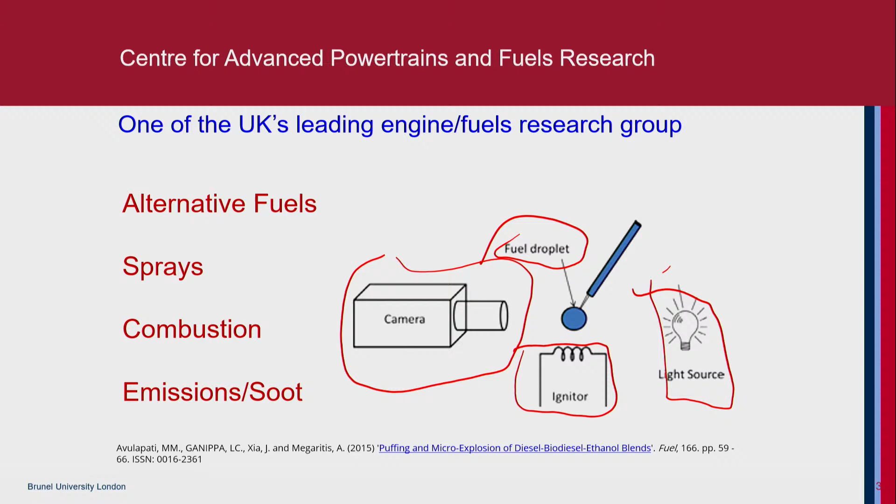Yeah, it's a very highly cited paper which we did together at this point. So if you have to do any work on fuels, then basically you need to have fuel here. So you have the fuel. You need to have a temperature here, an imaging device, and an illumination source. So this is a simple setup. We have a number of setups with high pressure or reciprocating engines, or maybe at fundamental levels, or maybe as jet setups also.

That's the background about Brunel and what I'm doing there. So let's go back to the course itself, high-speed flow theory and measurements in jet engines. Often myself and Dr. Madan discuss various research aspects, and this came up, and we thought we'd propose something on this. The topics that will be covered are given there. We look at the overview of gas turbine propulsion systems this morning, where we look at the turbojet, turbofan, turboprop, turboshaft, not in detail, just an overview.

Then this afternoon, we look into combustion in supersonic and hypersonic engines based on the Rayleigh flow theory. In the course, we'll also cover shocks, shock waves, and application of shocks in supersonic inlets. We also look at the nozzle flow under supersonic conditions. We'll look at ramjet and scramjet, and a major part of it is also measurements, where we look at various optical measuring devices and measuring techniques. So this is the typical content of this course.

Okay, now let's go into today's topic. It is the overview of gas turbine engines used in aircraft propulsion.

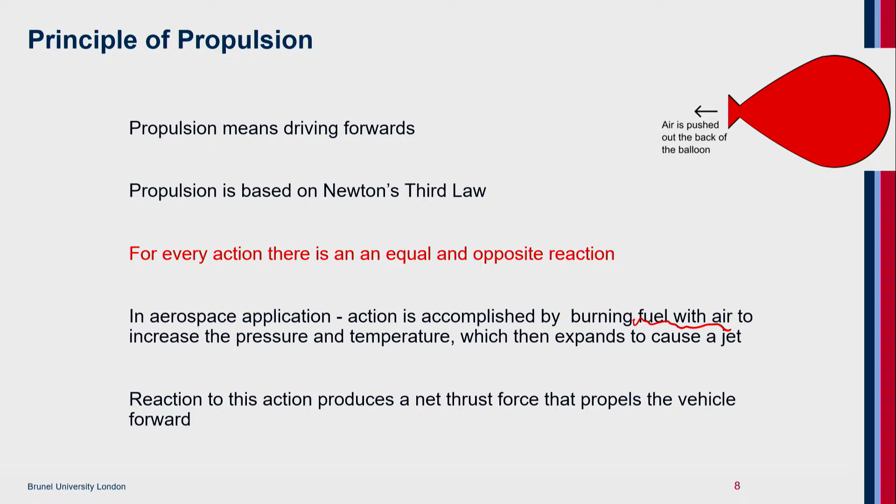So in aerospace applications, action is accomplished by burning fuel with air to increase the pressure and temperature, which then expands to cause a jet. So the reaction to this action is the thrust force that causes the aircraft to propel forward. Okay, so this is the basic principle of propulsion.

Now if you look at the classification of aircraft propulsion, basically you can classify them into two: air-breathing propulsions and non-air-breathing propulsions. I need not tell anything about rockets, because Sriharikota is not very far from your place. You're pioneers on rocket launching, but for this course we are going to look only at the air-breathing engines.

Until 1940, people were debating whether we need a two-stroke engine, a four-stroke engine, an air-cooled engine, a water-cooled engine, or a rotary engine. Much of the research was focused on reciprocating internal combustion engines until 1940. Since then, the gas turbine developed, jet propulsion started picking up, and not much talk is there, but still there are a few aircraft with reciprocating engines for training purposes. So we will be focusing more on the jet propulsion engines.

Within that, we'll be looking at gas turbine based propulsion today, and then we will look at ramjet, scramjet. If time permits, we'll look at the turbo ramjet also. Okay, so this is the overview which we'll be covering this morning.

Starting with a turbojet engine, it's a T38. What you see there is a twin turbojet engine. Second one is the commercial aircraft with a turbofan engine, and then also commercial as well as military application turboprop, and then you have the turboshaft engine here.

So let's look at the turbojet engine. So before we even look at it, let's... okay, I think I need to sit, it's too much bending here. Okay, so let's start with a turbojet engine here.

The basic fundamental aspect of a jet engine is the gas generator, which means it has three main components. One is the compressor, which is driven by the turbine. So the compressor is coupled to the turbine. The turbine gets its power and energy from the burning of fuel in the combustor. This is the cut section view of it. It's a very simple schematic, and this is basically what we call a gas generator.

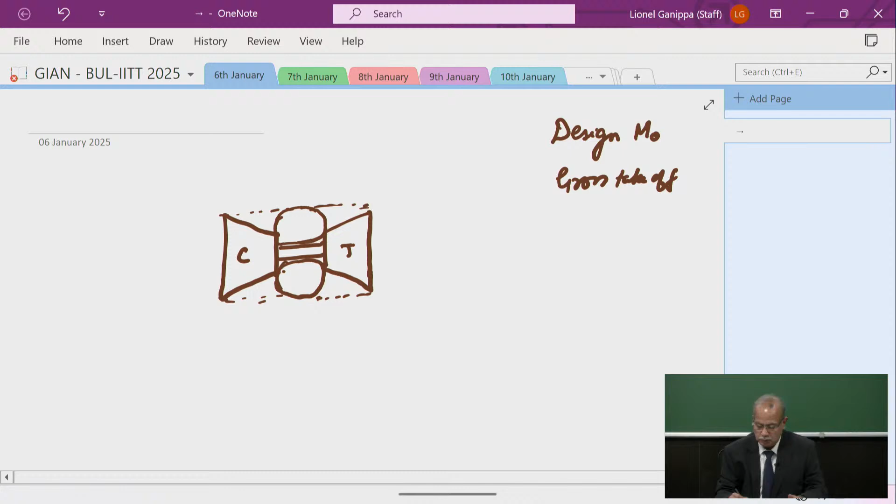Now you need to size these components. This sizing depends on what is the design Mach number, what's the design speed at which you want to fly the aircraft, what is the gross takeoff weight you want to lift the aircraft, what is the transonic acceleration, how quickly you want to go from Mach 0.9 to 1.1 or 1.2. That's what we mean by transonic acceleration.

Depending on that, we define the pressure ratio of the compressor, the adiabatic efficiency of the compressor, the amount of fuel to be injected into the burner, the air to fuel ratio in the combustor, what type of thermal barrier coating we need to apply onto the combustor, what is the thermal limit denoted by tau suffix lambda, the maximum temperature up to which the combustor can operate, the pressure ratio across the turbine, and the adiabatic efficiency of the turbine. I can keep going because they are made up of a number of stages, so there's stage efficiency, number of blades, and blade profile.

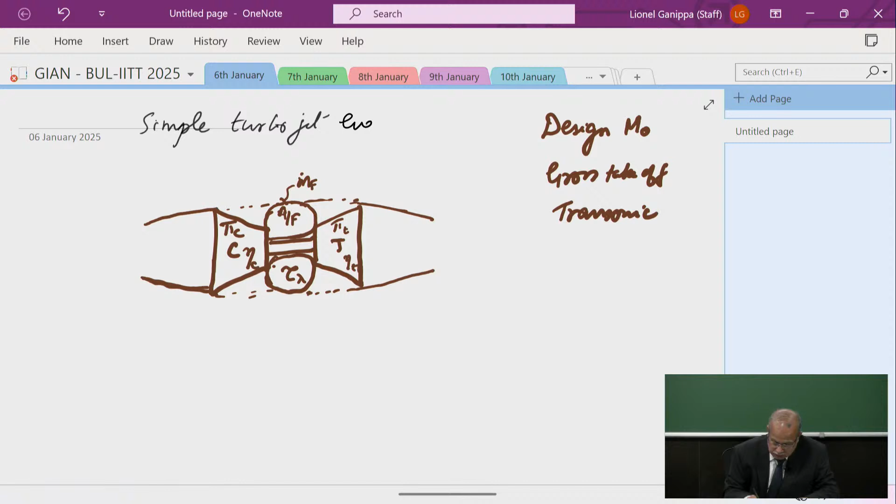So this is the fundamental aspect of it. This is called the gas generator. Now if I add an inlet to it, and if I add a nozzle to it, this becomes a simple turbojet engine. So here is the inlet, and here is the compressor.

Were you able to see what I was writing out? It disappeared. So this is the inlet, and this is the simple turbojet engine. So here is the nozzle here.

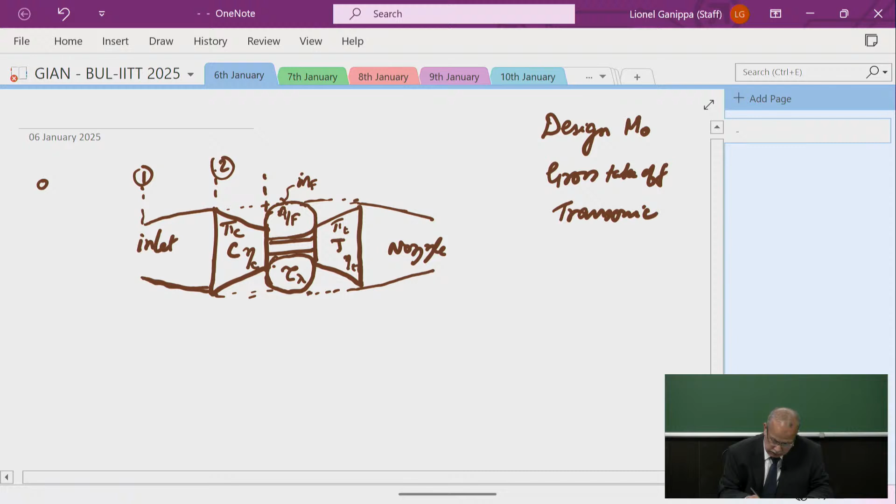The standard aerospace recommended practice is that this is the atmospheric environment at which the aircraft is flying - the unperturbed condition, station 0. Inlet lip, here is the front of the compressor. So exit of the compressor and inlet to the combustor. Exit of the combustor and inlet to the turbine. And here is the exit of the turbine, station 5.

Now, as I mentioned, this is a simple turbojet engine which we are going to develop further. There will be some components coming between station 5 and the exit, station 9.

So an aircraft is flying at flight static conditions. The pressure will be P naught, the temperature will be T naught, the density will be rho naught, and the velocity will be V naught, with the corresponding Mach number M naught.

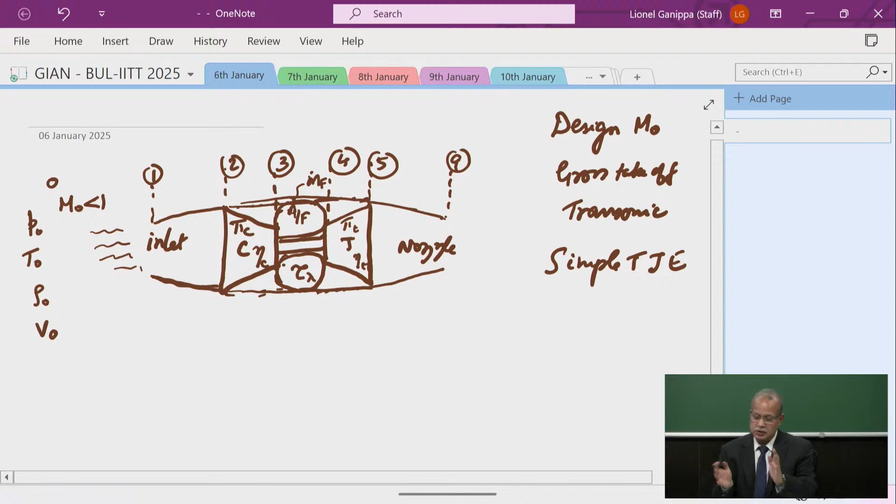So when the air enters into the engine, you can see that the function of the inlet is to decelerate the flow. We are now looking at a subsonic flow. The flow enters into a diverging geometry. So as the flow enters into this engine, what happens? The velocity decreases. What is the effect of a decrease in velocity?

When I talk about velocity, there is a specific kinetic energy associated with it. The kinetic energy here at this point decreases. This is where the principle of conservation of energy comes into picture. The energy decreases in one form and disappears, but it will reappear in some other form, which will cause the pressure to increase. So that is the main function of the inlet - to decelerate the flow, make use of that kinetic energy, and increase the pressure.

The whole objective is to improve the efficiency of the combustion process. We need high pressure into the system, so you increase the pressure. At the same time, we need to minimize the losses. That is the main function of the inlet.

Then the air passes through the compressor based on the pressure ratio of the compressor, which is designed based on the flight speed. As a rule of thumb, the faster you go, you don't need a high pressure ratio because you get the ramming effect there. Based on the pressure ratio of the compressor, you increase the pressure and feed that high pressure air into the combustor, where fuel is injected, mixed with air, and burned to high temperature.

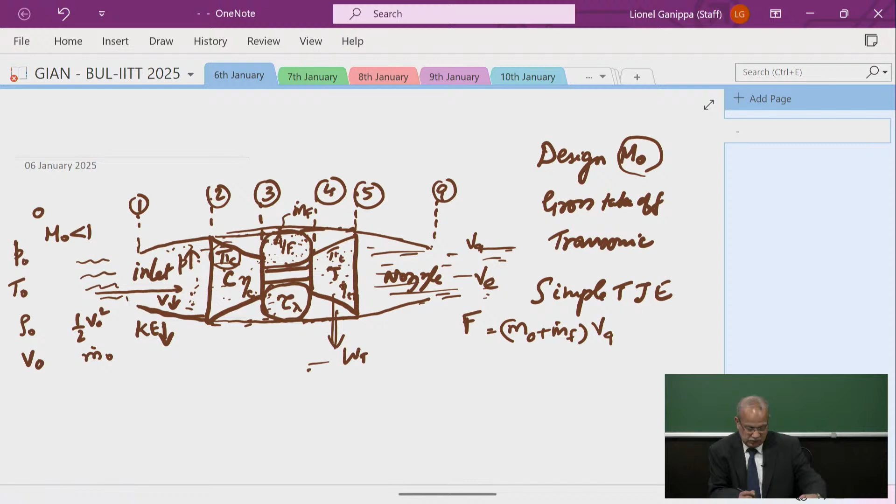The high temperature burned gases expand through the turbine, and that turbine produces some work. The work produced by the turbine is used to drive the compressor. The amount of energy left out is expelled out of the nozzle, producing the velocity of gas exiting, V9, and then the thrust produced is equal to the mass coming in, m dot O plus m dot F. This is the gross thrust produced by the engine. Okay, so this is the basic principle of operation of a turbojet engine.

Now let's try to look at it from a thermodynamic point of view.

So on the y-axis is the enthalpy, on the x-axis is the entropy. This is the unperturbed free stream condition. The pressure is flight static pressure P naught. Let me represent it on an HS diagram. This is the pressure P naught, and these are the isobars going in this direction.

Now it is flying at a certain environmental pressure and at a certain temperature. So this is the temperature, T naught. So when I say enthalpy, which is nothing but Cp times T, Cp is constant here. So here is S naught. These are the initial conditions, the flight static condition, O.

Now imagine we are not even going into the engine. I'm going to put a pitot static tube outside. So what will happen here? The flow, coming at a velocity, let's say Mach 0.8, eventually as it approaches the pitot static tube, decelerates, which means kinetic energy is being lost. Eventually it comes to the point at the tip where the velocity is 0.

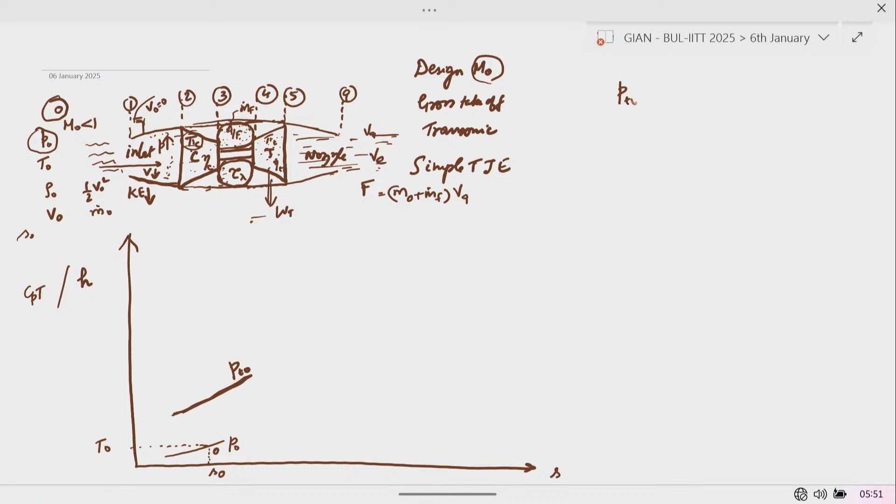So there is a relationship between stagnation pressure to static pressure: equal to 1 plus (gamma minus 1)/2 times M naught squared, raised to the power gamma/(gamma minus 1). There is also a relationship for TT naught by T naught, between the local property and the stagnation property, equal to 1 plus (gamma minus 1)/2 times M naught squared. Similarly for density, we won't look at that now - it involves the same term raised to 1/(gamma minus 1).

So here is the static pressure, and this is the corresponding isentropic stagnation condition, and this is the isentropic stagnation enthalpy, HT naught. One of the things even in real life applications is that the inlet is treated as adiabatic, and also the nozzles are treated as adiabatic. So here it is adiabatic, and here also it is adiabatic.

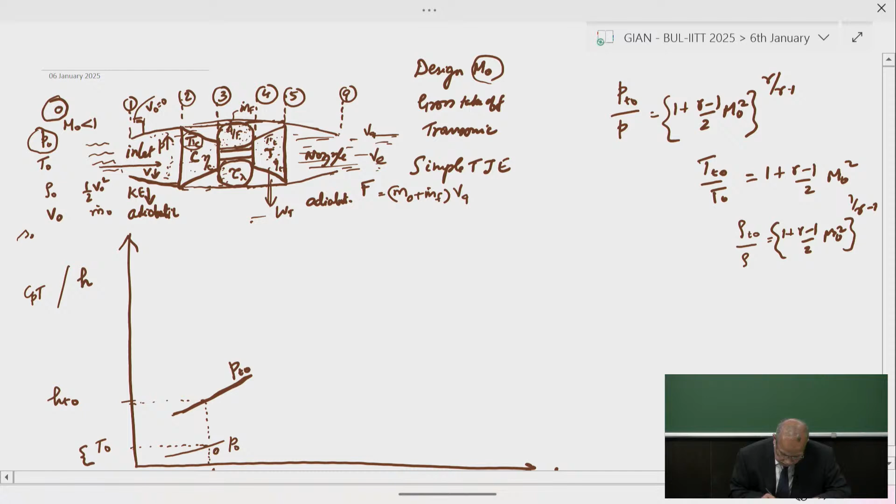Now this magnitude is the thermal energy, H naught, at which the flight enters in. So this is the point here. We have this flight entering at Mach M naught. So here is the thermal energy, and now here at this point, this is the kinetic energy, which is half V naught squared.

So what I am writing here is H naught plus half V naught squared, which is the energy balance equation - this is the total energy. That's what I write here. So H naught plus half V naught squared is the total energy, and total energy remains constant here.

Now the air enters into the inlet. The static pressure increases, and eventually we have a stagnation pressure here, PT naught. So from here to here, this is the process.

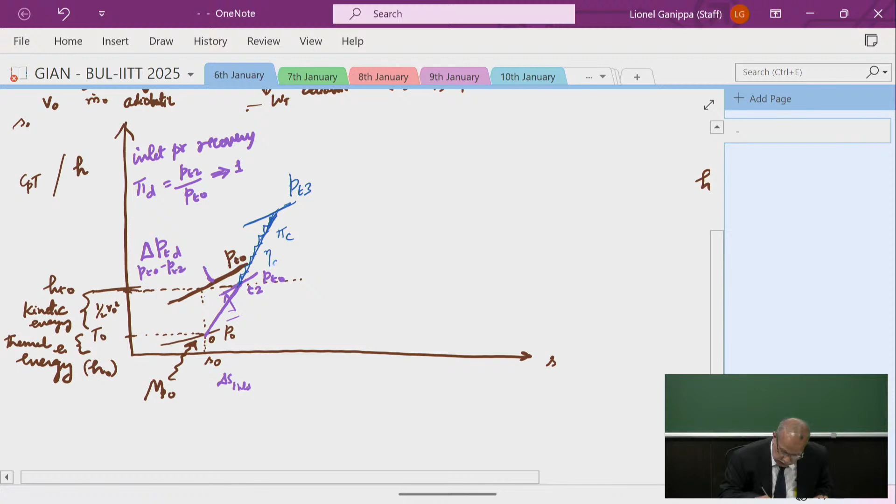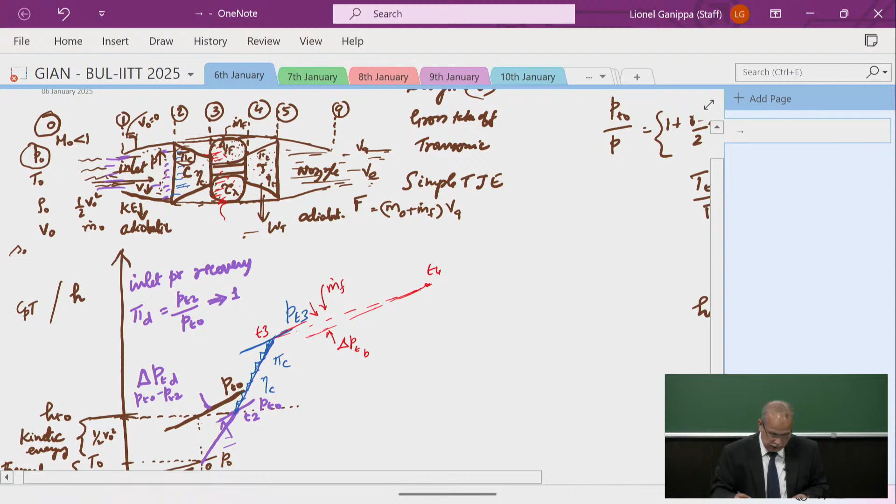Now once it has entered into the compressor and been pressurized, it enters into the combustor where air and fuel are injected. Combustion takes place at constant pressure, but in reality there will be pressure loss, delta P, total pressure loss in the burner. So here it is PT3, here T3, and here T4. This is where the fuel is injected, mass of fuel is injected, and fuel and air will mix to form an appropriate mixture, then burn and increase the temperature, after which it will expand in a turbine.

So it expands further in the turbine depending on the expansion ratio, giving pressure PT5 from PT4. So this is state T5, and then whatever energy is left out will be expelled out of the nozzle, where expansion takes place to the ambient conditions, flight static P9. So you can see it starts with static pressure, goes to stagnation, then ends up here. This is the nozzle pressure ratio, total pressure ratio across the nozzle. These are all geometrical parameters related with the nozzle, and it expels out at this point with velocity v9, from which we can calculate the thrust and so on.

So this is the typical cycle diagram of a simple turbojet engine.

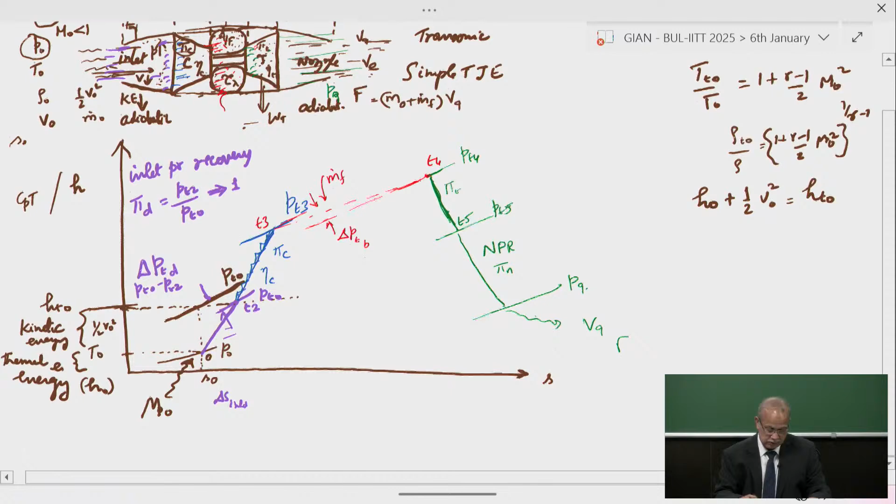Now let's look into the development of this simple turbojet engine, because not always do we want to operate it like this. At times, suddenly, if an enemy wants to attack, then probably you need to escape - that's what we call a dogfight, one aircraft chasing another. You drop the bomb, and then your adrenaline level goes up, you have to take a steep climb. In that case, you can't just do this maneuver with the existing engine.

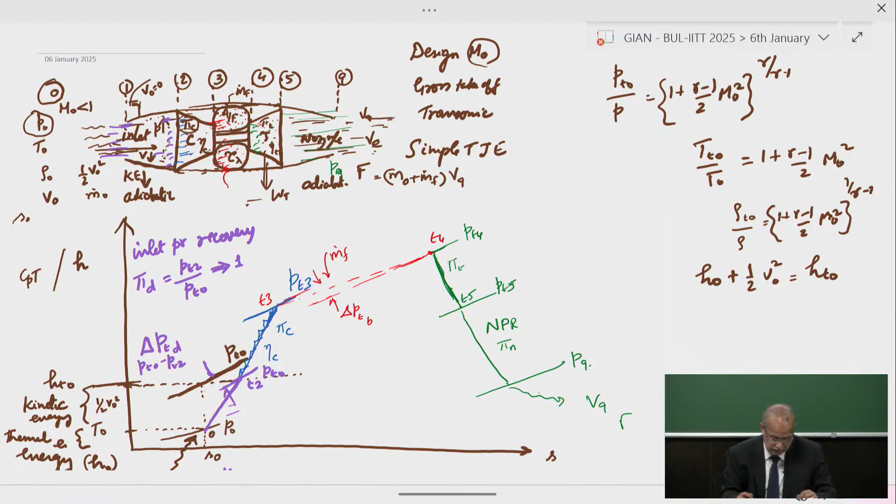So you need to modify the engine, and that is through including a term called afterburner. Now, what is an afterburner? Afterburner is a device that could be fitted to this simple turbojet engine so that we can have thrust augmentation. So if you are going to double the thrust, then the fuel consumption will quadruple. So we can't always use the afterburner - you use it only for a very steep climb or in emergency conditions, and then switch it off.

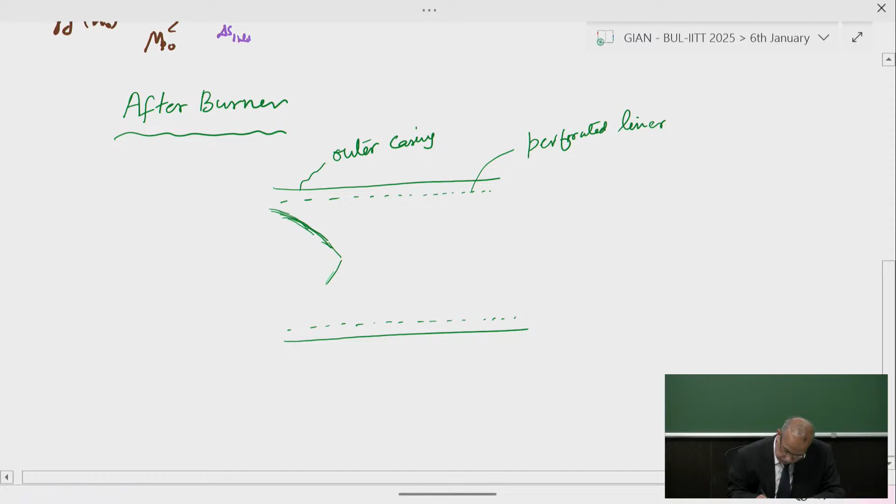Afterburner will have a device which has some casing, outer casing. It has a perforated liner. And this afterburner also, before the charge enters in, has a pre-diffuser. So this is the arrangement here - you can see that diffusing geometry. The whole idea is to decelerate the flow further down to reduce the velocity so that you could increase the residence time of the charge in the combustor.

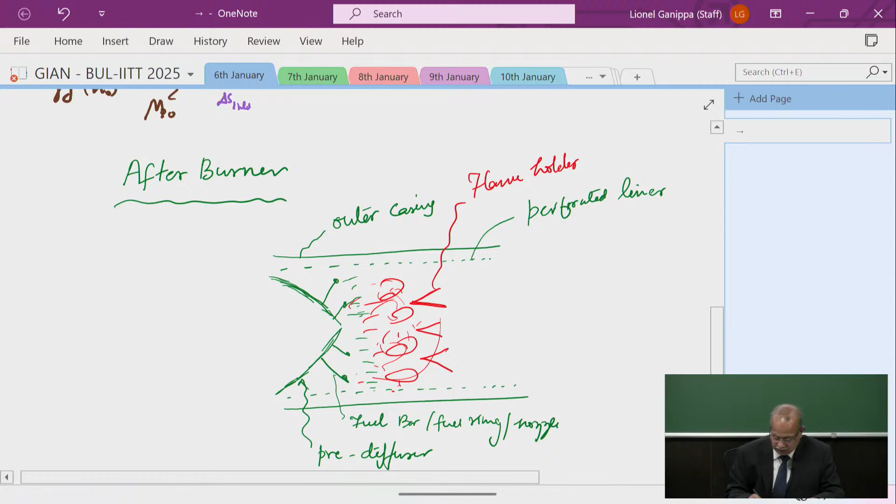And then we will have fuel bars or fuel rings to hold the fuel nozzle. Now this will be squirting fuel here. We want to make sure that the flame is there in this combustor participating in the combustion. To do that, we need something called flame holders. What's the function of the flame holder? The function of the flame holder is to create a local recirculation zone, so we increase the residence time of the fuel and air to be mixed and burnt, and then it will produce much higher temperature, and then this must be expelled out.

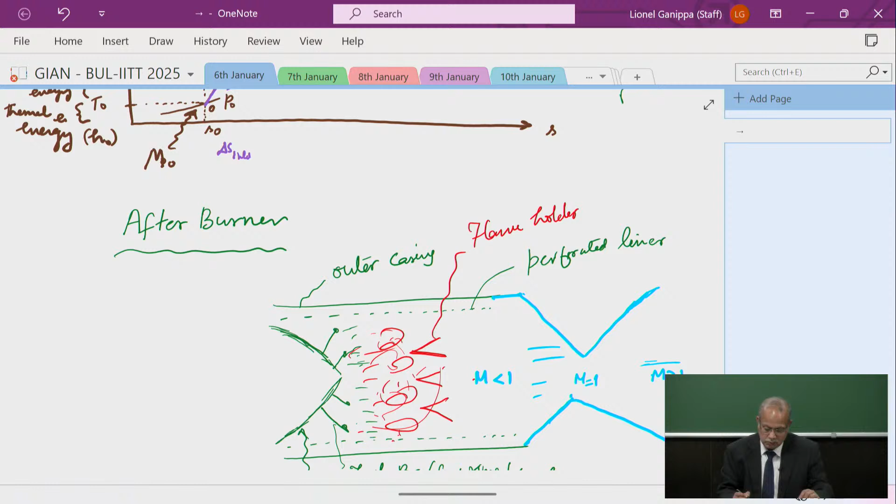To get the benefit, we need to use a nozzle with convergent-divergent geometry. When you have this geometry, Mach number will be less than 1 as the flow passes through it, approaches Mach equal to 1 at the throat, and then accelerates to Mach greater than 1. So you have the benefit of momentarily boosting and augmenting the thrust to go to high subsonic or low supersonic speeds. This is the afterburner.

Now where is this afterburner going to be fitted in this engine? Let's look at this diagram here.

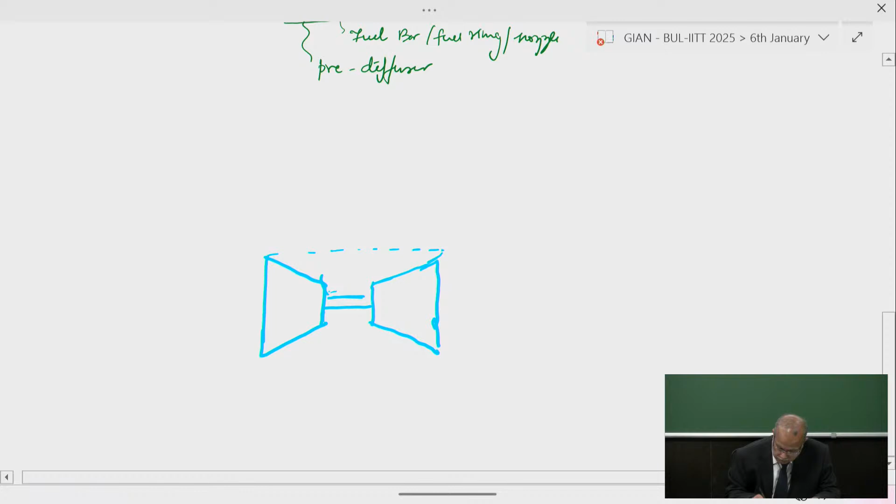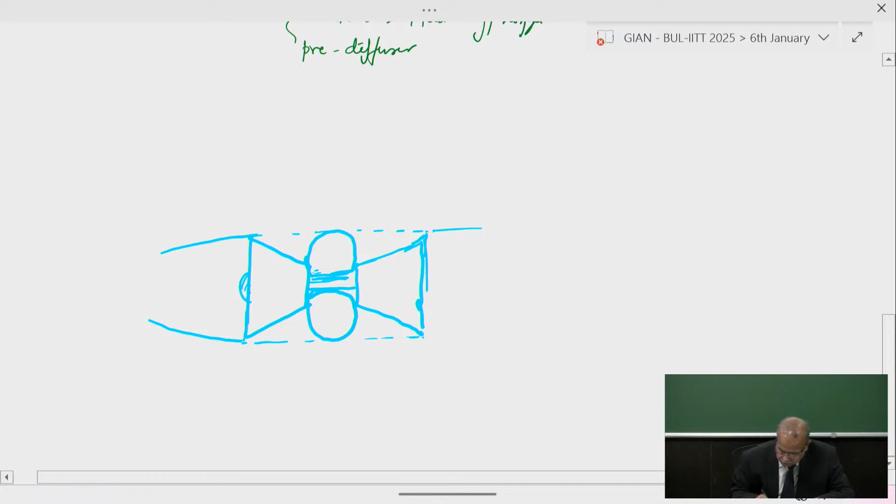As we discussed before, here is the compressor, here is the turbine, and this is the combustor. This is basically the gas generator, and this will have an inlet. This is the shaft that couples the turbine and the compressor, sometimes called a spool. Here is the fuel bar, and this is the afterburner with a perforated liner in it. Then you have this convergent-divergent geometry.

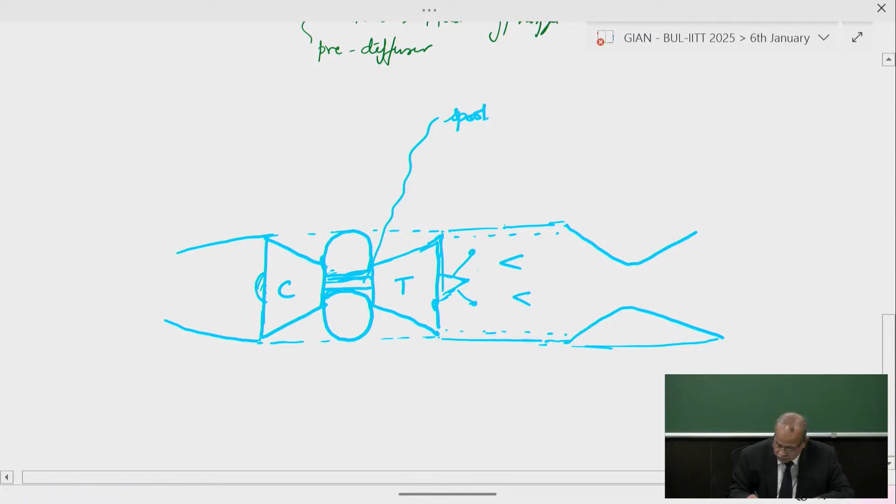Here you can see the unperturbed free stream condition. This is the inlet lip, frontal face of the compressor. Here is the end of the compressor, and it's the combustor, here is the burner. So if the mass of fuel is injected and is burned, here it is station 4, and here it is station 5. Now this whole afterburner unit is treated as a pipe with an afterburner device, and here is station 7, the end of the afterburner combustor. This is the throat, area 8, and this is station 9.

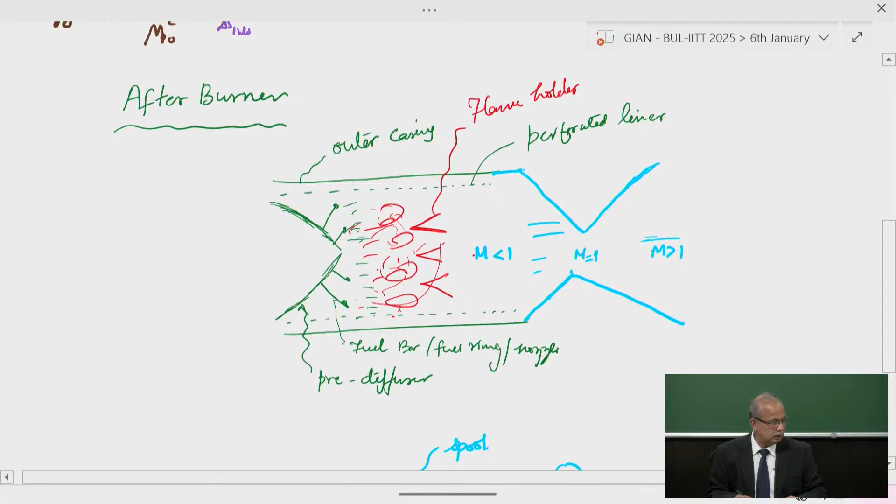So you can see that a simple turbojet can be modified by including an afterburner. If we include the afterburner, we are able to momentarily increase the thrust. The benefit can be obtained by having a convergent-divergent nozzle, which we'll be discussing a bit later on.

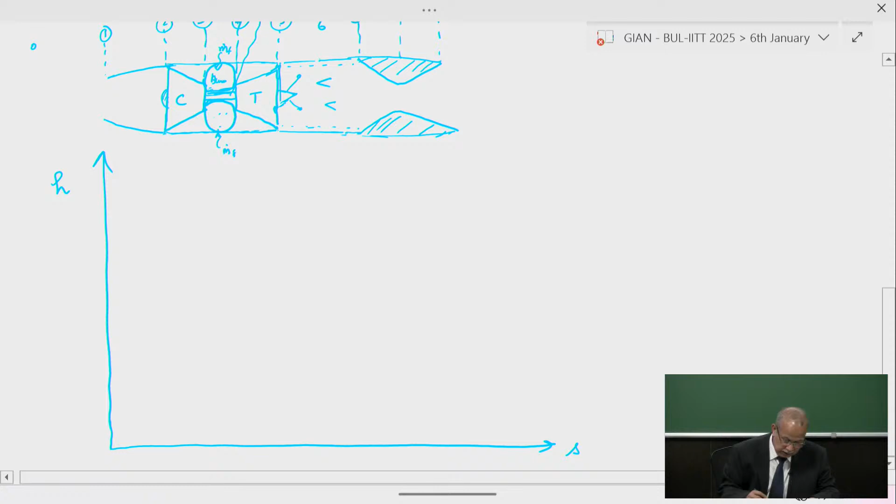Now let's look at the cycle diagram for this application. Here is the enthalpy, this is the entropy diagram. Here is the unperturbed free stream conditions. Now you know the details of it. Here is H naught thermal energy, S naught.

Here is the flight stagnation condition, PT naught corresponding to T naught. The total energy in the inlet is constant. This is the pressure PT2 at the face of the compressor, state T2. This is the point here, T2.

Then the charge will enter into the compressor. It will be pressurized. Here it will be pressure PT3, and here is the state T3. So this is the total state 3.

Then in the combustor, this is the actual path through which combustion takes place. This is the pressure PT4, this is the state T4. In other words, this is the maximum thermal limit, denoted by tau lambda. Tau lambda is basically the enthalpy at this point, which is HT4 over H naught, the maximum value. It's in non-dimensional form. This maximum temperature is also called the cycle temperature or maximum turbine inlet temperature, various terminologies.

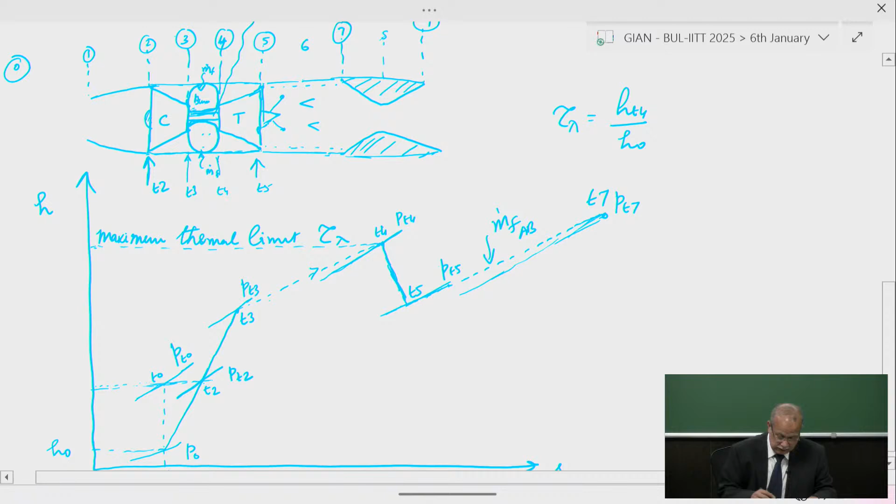Now it enters into the afterburner, where again fuel is injected. So the pressure at the exit is PT7. Here is the combustion taking place with the mass of fuel injected in the afterburner, so this is T7. Again, depending on the combustor properties, you can go up to this level or keep it to the same level as the previous combustor thermal limit. To differentiate it, I can say this is the thermal limit in the afterburner.

Then it expands in the convergent-divergent nozzle, so you can see that you are able to produce higher thrust here, down to point P9. So this is how the cycle diagram will look like for a simple turbojet with an afterburner.

So we've got some fundamental understanding now. So now let's go into the real applications of it.

So this is the inlet. This is the part of the inlet here. So all the process that I have explained, the physics is happening here. The kinetic energy is utilized to increase the pressure.

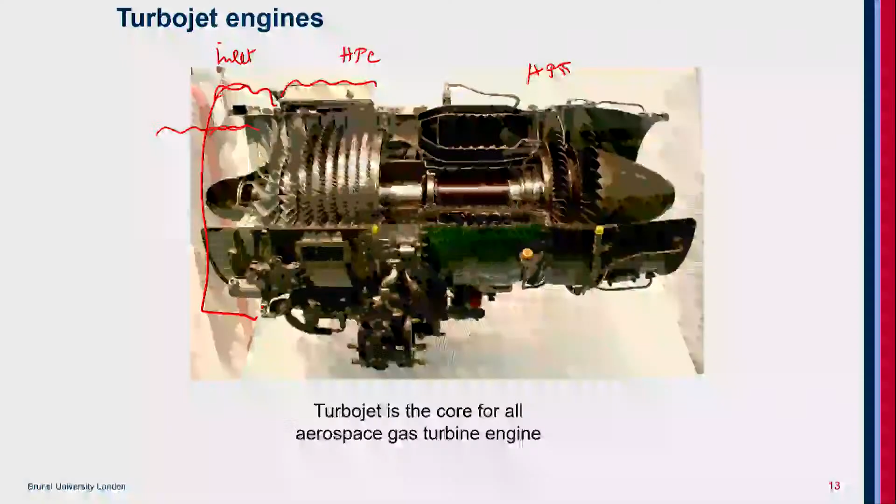So a rotor and a stator comprises one stage. A compressor will have a number of stages, maybe 8 stages, or it can have 2 sets of compressors, low pressure compressor and high pressure compressor. So depending on the number of stages and number of compressors, the pressure ratio will be varied.

So the high pressure air that is being pressurized in the compressor, after it's coming from the inlet, will enter into the combustor. So this is the combustor. And here the fuel is injected and it is mixed here and it is burned to have an optimum fuel air ratio. F is the fuel air ratio, which is the mass of fuel by mass of air.

And then the burned gases will be directed to the turbine where you get the power. That power is transferred to the shaft to drive the compressor. The amount of energy that is left out is going to be expelled out in the nozzle.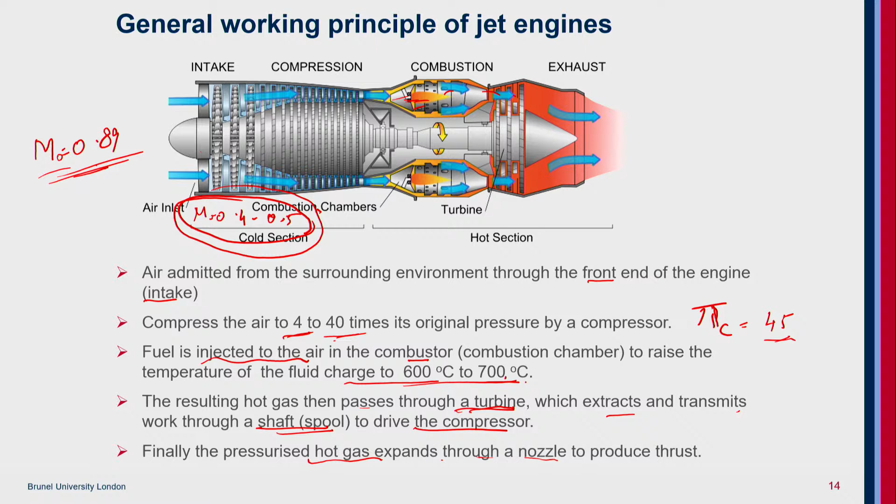That's the maximum limit. Then the pressurized air enters into the combustor, and the fuel is injected and mixed with the air in the combustor, and again the temperature increases depending on the mixture, fuel, calorific value, all those aspects. Then the hot gases will expand through the turbine, which extracts and transmits work to the shaft to drive the compressor. Finally, the pressurized hot gases expand through the nozzle to produce the thrust.

So the schematic that we explained before is now a bit more clear here. These turbojet engines are not fuel efficient, so a lot of modifications need to be made to improve fuel efficiency. But they are still used for defense applications because fuel consumption is not an issue for defense, and also for missile applications.

So I have explained this process of enthalpy and entropy separately, so now it's much easier for you to understand looking at the global scale here.

Now, one of the ways that you can modify a simple turbojet to augment the thrust is to include an afterburner. So here is this simple turbojet, and here is the one with the afterburner.

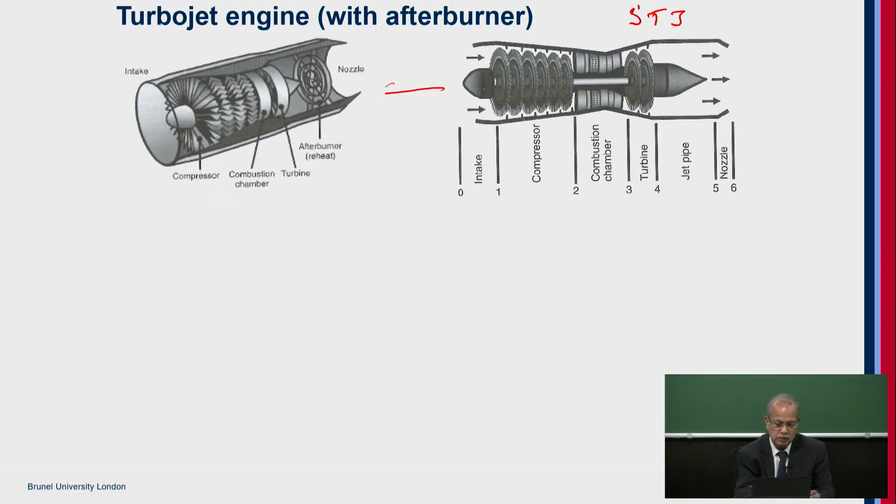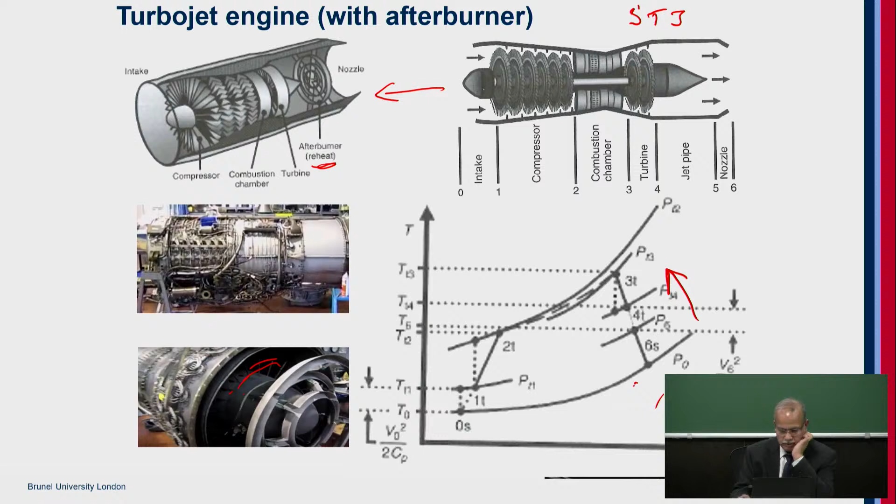So the cycle diagram - after it has expanded to PT3, PT4, then it will have a combustion process here in the afterburner, then expansion will take place. This is how the cycle diagram will look like. Understood?

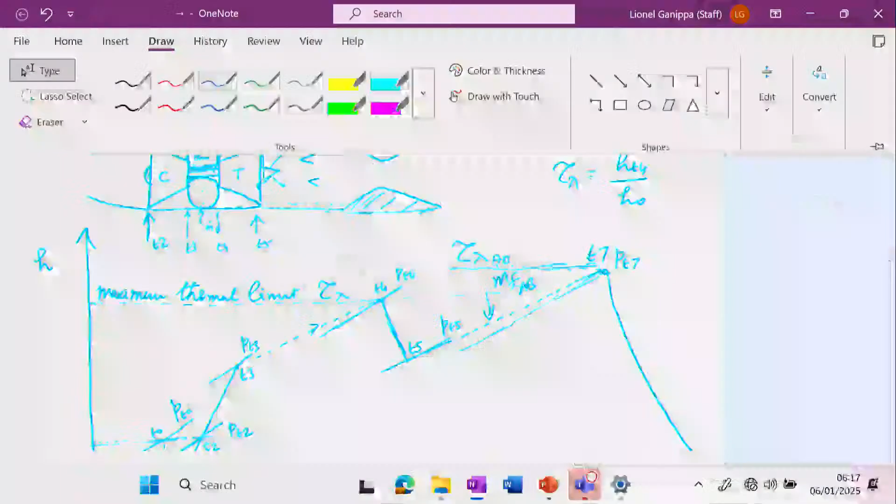So now let's look at the modification of a turbojet engine. Most of the commercial aircraft are really concerned about the consumption of fuel. They put a lot of focus because they want to make sure that they are fuel efficient. So let's see how the principle works - it still has the gas generator.

Here is the combustor. Here is the compressor. Here is the burner. Here is the turbine. This is the gas generator.

So the principle of going for a turbofan is basically an energy recovery process.

This is the gas generator, as we have seen already. Any further energy that is left out, energy that could be harvested, is done through incorporating a turbine, which is called the low pressure turbine or a free turbine. Sometimes it is also called the power turbine.

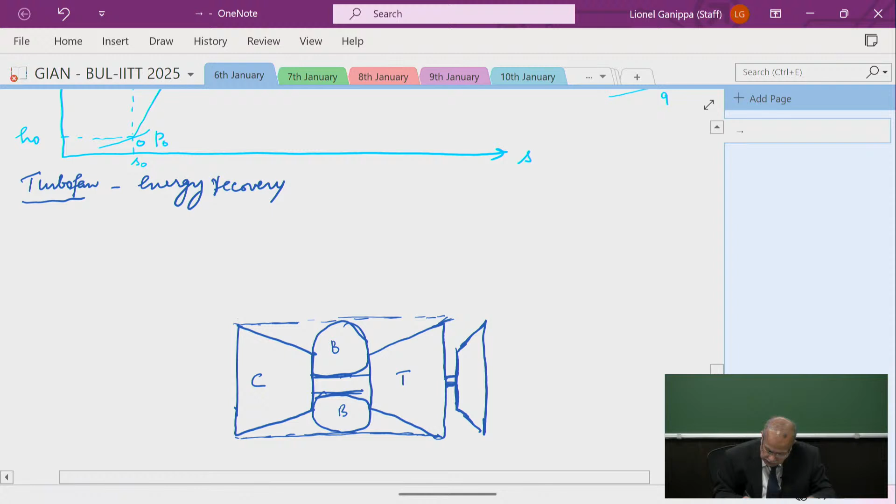Now you can see that this shaft is of different coupling to this one here. Now use this shaft power to drive a fan, and to place the fan inside a duct.

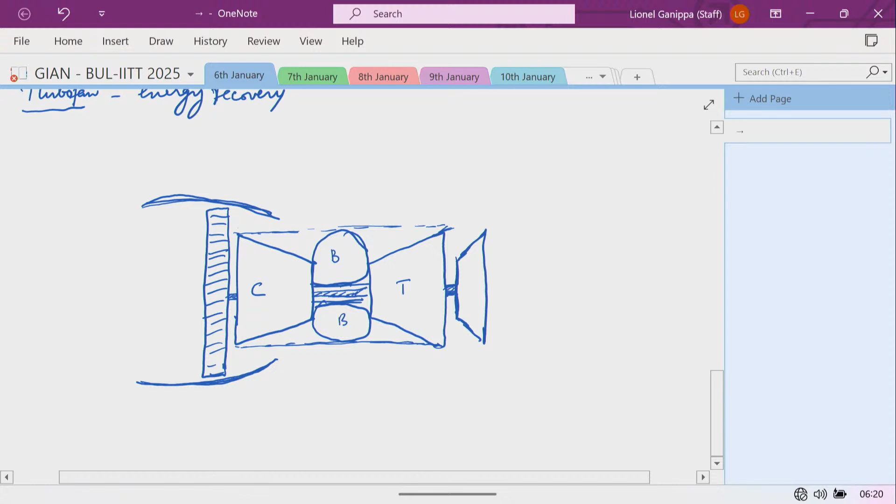So you can see that the central core of the jet engine is the gas generator, which is the basic building block. Whatever energy is left out is harvested in the low pressure turbine. So this is the high pressure turbine. The turbine which is closer to the combustor is the high pressure turbine, and the compressor that is close to the combustor burner is the high pressure compressor, and so on.

So this is the fan. We use this energy from the low pressure turbine to drive the fan.

So the station points are as follows: this is the flight static condition, inlet lip, and this is the frontal face of the fan, 2, and here it is 3, here it is 4. You treat it as one device - there are different ways to do it - and then here it is 9, in between 4.5, and here it is 13 and 19. These are some of the standard ways through which they are numbered.

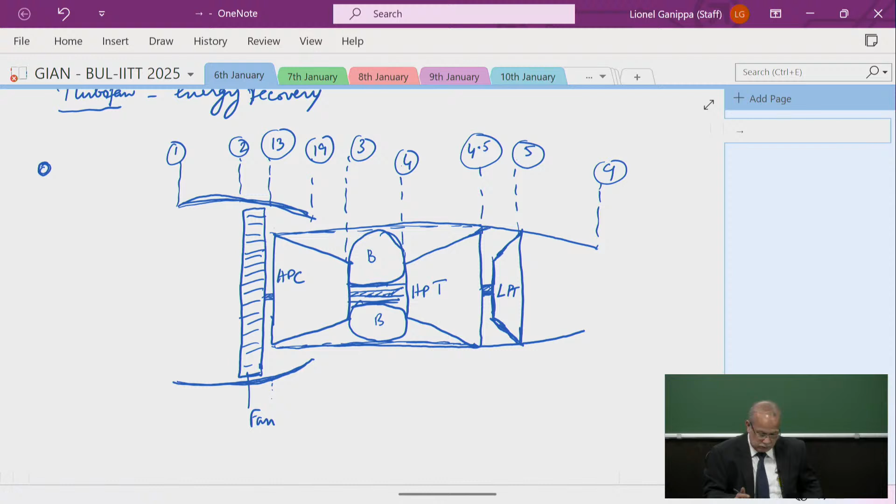So the principle is the air is drawn into this. You can see the frontal area is much larger, so when the frontal area is larger, you have a much higher mass of air drawn, which means it is going to be a benefit for the thrust, which is m into v, the thrust.

Now let's look at this one here. So the air is drawn through the inlet, and here you can see this is the air that is drawn into this inlet. So I put two colors here: the color which is red is the only mass that enters into the core of the engine to the high pressure compressor, just like how it's happening in the turbojet, where it is being compressed.

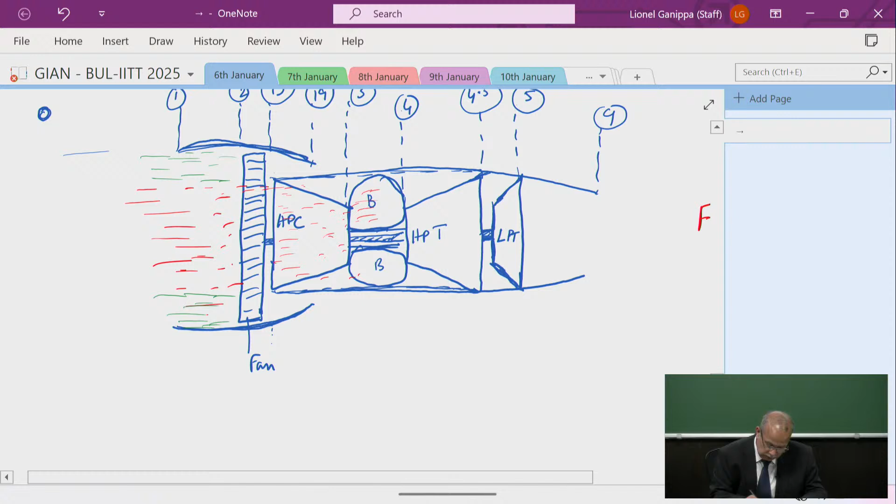Now only a small amount of air is drawn in relatively, so the amount of fuel consumption will also be reduced here, and then burnt air will expand through the turbine, and still that energy left out will be harvested to drive the fan, and then it will expand through this nozzle to produce thrust.

Now that part of the air which is not entering the core is called the air that is bypassed, the mass flow of fan, capital F. The fuel is small f, capital F for fan. So this mass is bypassed - they are pressurized here, and then it enters.

Now what you can see here, again there is a nozzle here - this is the thrust. This is the thrust that is produced by the fan nozzle. Here the thrust is produced by the core nozzle. So this is hot, this is cold, but nevertheless you are going to get thrust from this.

So here the velocity is V19, so we are going to get a velocity coming out. Here it is V9. So when we look at the thrust, it comes from the fan nozzle plus the thrust that comes from the core nozzle. Because you're not going to add any fuel to this green part of the air that is being bypassed, the engine becomes a bit more silent compared to a turbojet engine - you're not putting more energy into it.

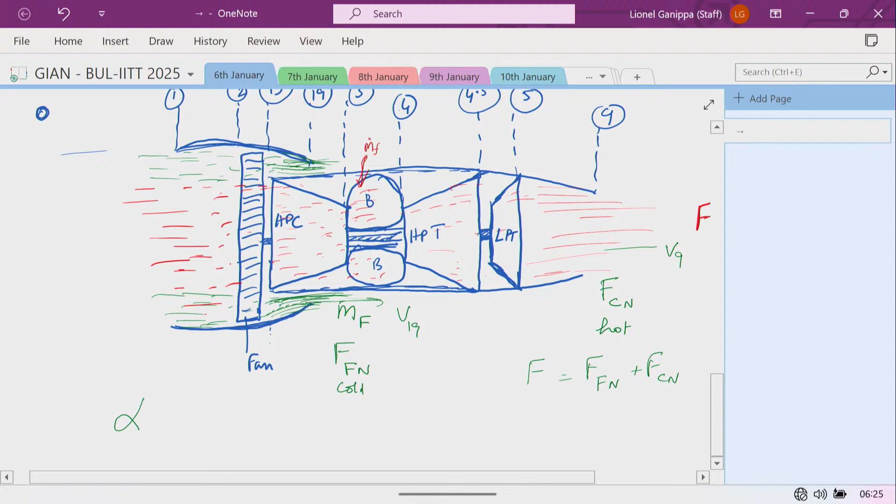And then we define a parameter which is called the bypass ratio alpha, which is the mass of air that is bypassed without participating in the combustion - the bypass ratio.

Now all of you understood this one, yes?

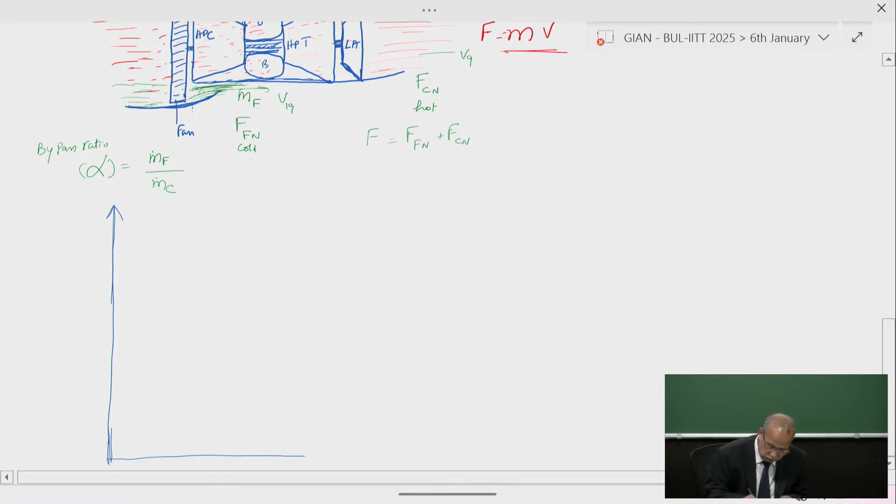Now let's try and understand the whole process on an enthalpy entropy diagram. Here is the unperturbed free stream conditions, having pressure P naught, T naught, S naught, H naught, M naught, V naught, all of the parameters. So here is the pressure P naught, this is the enthalpy H naught, this is the entropy S naught. This is the state, unperturbed flight static state.

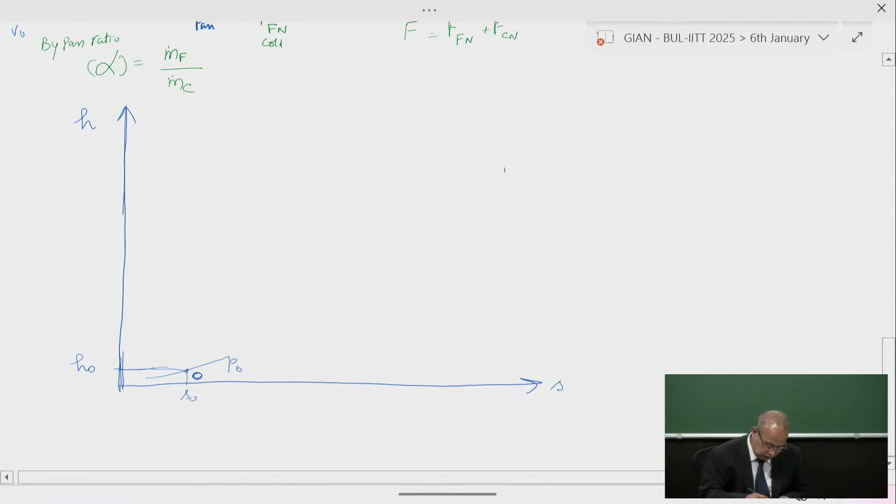From here, the charge enters into the inlet. So here is going from, what are the points here? So here it is the pressure PT2, this is the pressure here. So this is the state T2. So this is happening in the inlet.

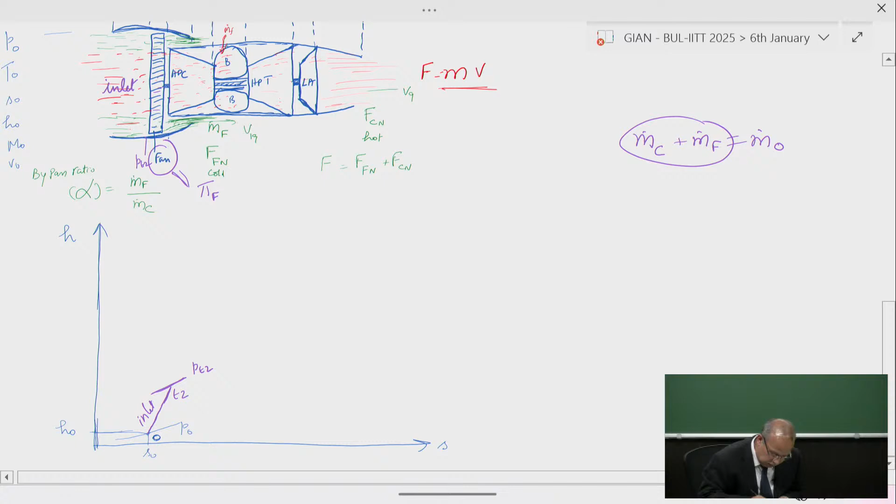After which, total mass of air will pass through the fan, and the fan will also have a pressure ratio pi F. Depending on the pressure ratio, we'll be able to increase the pressure up to this point. What is the state point here? PT13, and then this is the T13.

Now I'm going to look at the core flow. What will happen to the core flow? The core flow will pass through the compressor, and it will be pressurized to PT3. So this is the T3 in the compressor. This is fan.

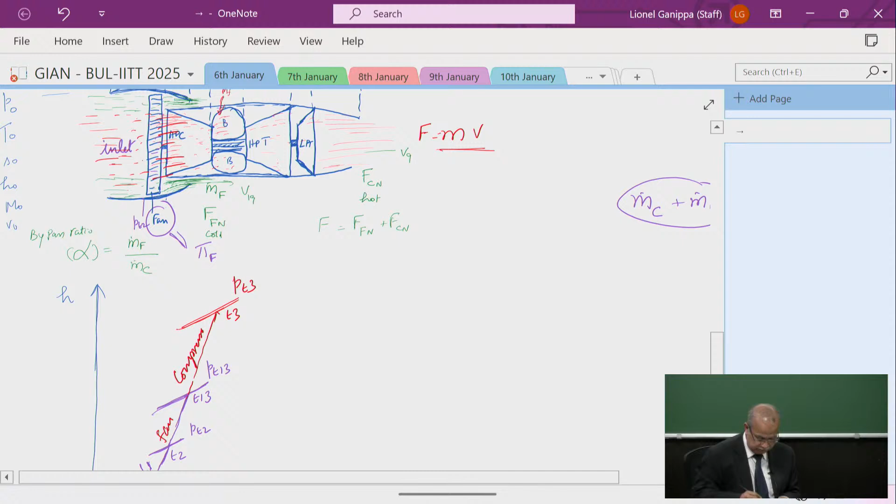And then the core flow will pass through the combustor to T4. This is the pressure PT4, state point T4. Then it will expand in the, so here is the combustor. Now here is the high pressure turbine, expands here to PT4.5, then again expands further in the low pressure turbine to PT5, and then it expands in the nozzle to produce the thrust.

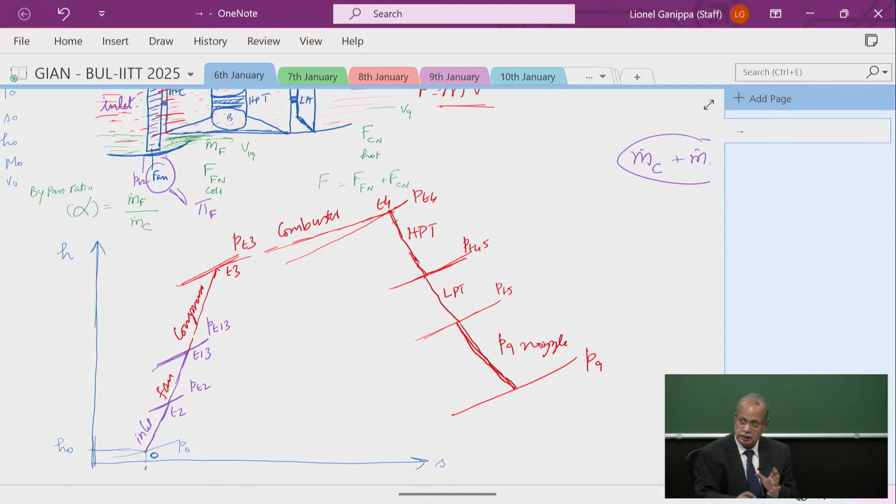As already mentioned, inlet is adiabatic and nozzle is also adiabatic. So this is the cycle diagram for the charge that enters into the engine and then thereafter passes to the core.

But this is not the full picture. The full picture is that there is air which is here at this point. After it has entered into the fan, it is not entering into the core, it is being bypassed, and then it is expanding from this point. Now here you see P19, T19. So this is the cycle diagram for a turbofan engine. So this is called turbofan.

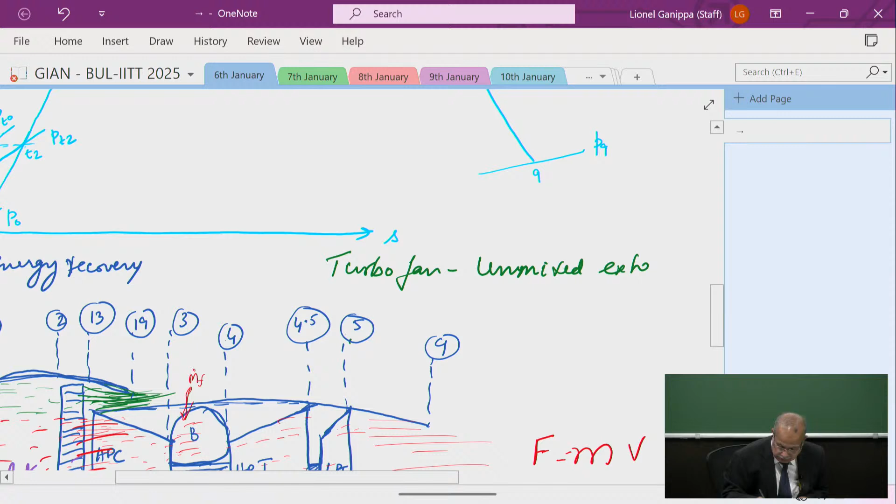Now here it is called unmixed exhaust turbofan engine. The reason why it is called unmixed exhaust is because the air that is being bypassed is not allowed to mix with the burnt gas. Red and green are totally isolated. They are not mixed at any point in time. So that is called unmixed exhaust turbofan engine.

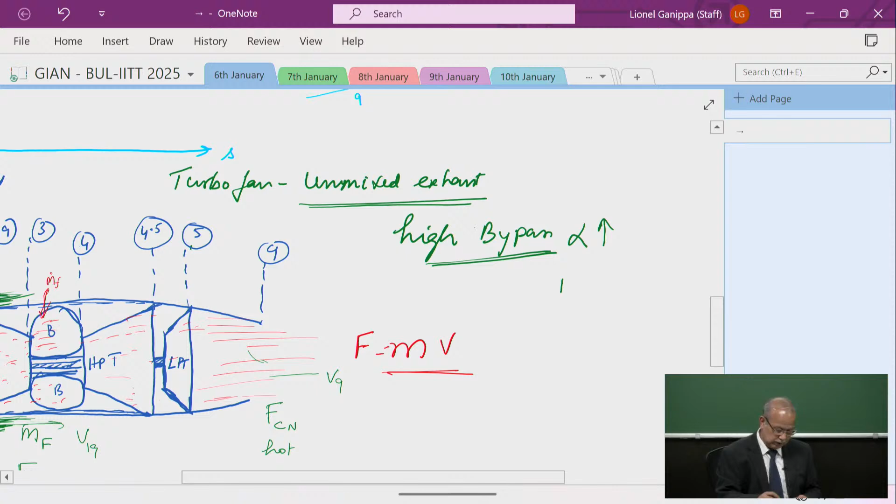So this is the, now the advantage of this is because they are not mixed, we can go for high bypass. Higher the bypass is much better. You have better fuel consumption, much reduced, because you are getting more thrust from the air without participating in combustion. Okay, so that's the benefit of it.

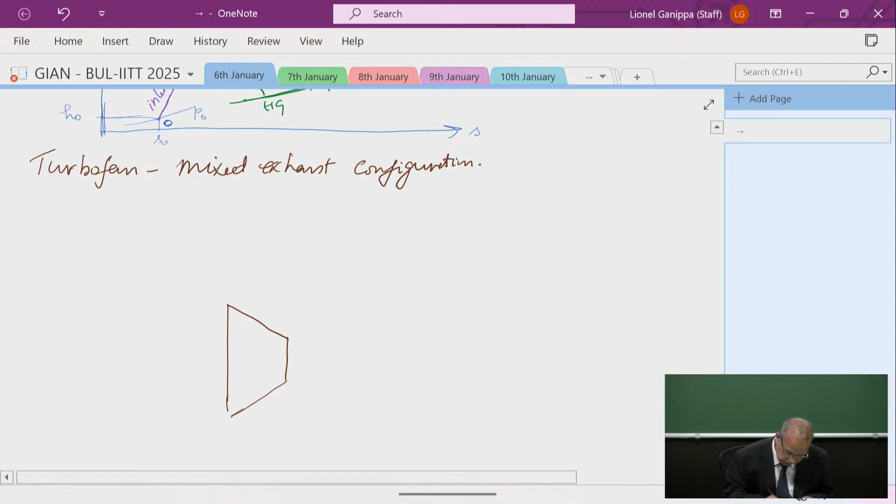So high bypass engines. Now the next concept of the turbofan engine that I'm going to look at here is, let's start with the gas generator here. So let me give this one here, it's a turbofan. This is the mixed exhaust configuration. You don't have much of this in operation now because of some limitations, but nevertheless there are some limited flights which use this. Majority of them use unmixed exhaust.

So here is the gas generator. So here is the high pressure compressor. Here is the burner, high pressure turbine, and whatever energy that is left out, so this is spool 1, is going to be harvested using a low pressure turbine, a different spool, which means that when you drive these components at different speed, it is better for internal aerodynamics because you can streamline the flow according to the design specifications of each component.

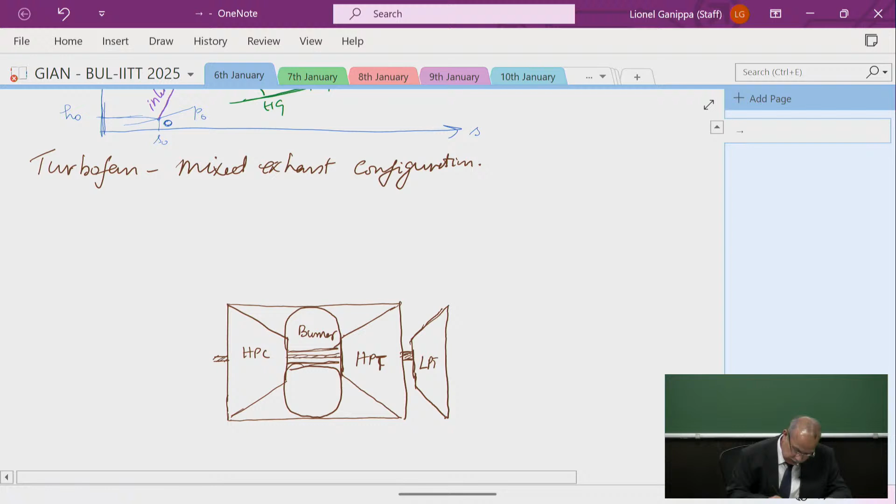Otherwise, if everything is going to be coupled, then you can't optimize the aerodynamic characteristics, internal aerodynamic characteristics of it. So here is the second spool from which you run the fan. The configuration is very similar to what we have done before. But then it is enclosed in a duct.

Then this is a nozzle here. So you're able to appreciate it now here. So here is the unperturbed free stream condition. This is the inlet lip, the frontal face of the fan, 2. This is the exit of the compressor, 3. This is the exit of the burner, 4. And this is the exit of the turbine. This is the exit of the nozzle, 9.

So here, this you can have it as 4.5. Here it is 6. I'll put the word here mix M, because the bypassed air will mix at this particular point.

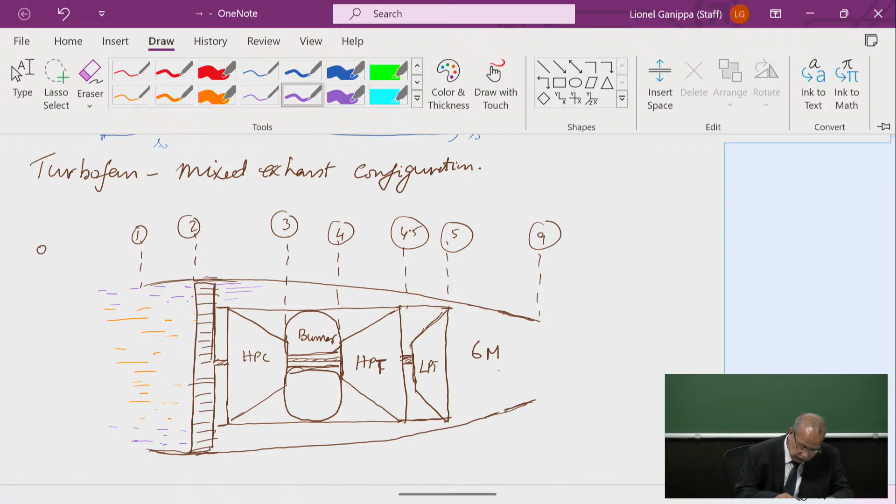So this core will pass through the high pressure compressor, get pressurized, and mix with the fuel. Fuel will mix and then it will burn. Then you have the high pressure turbine and the low pressure turbine, and then it will come to the mixing chamber before it expands out.

Simultaneously, now you can see the bypassed air will be passing through the outer core of the central core of the engine. This is the central core of the engine here. So this is going to pass through.

Now what is going to happen is that because of this high temperature, this is going to give off heat. So as the purple part of the air, the bypassed air, passes through, the temperature increases by gaining heat from the actual combustion process.

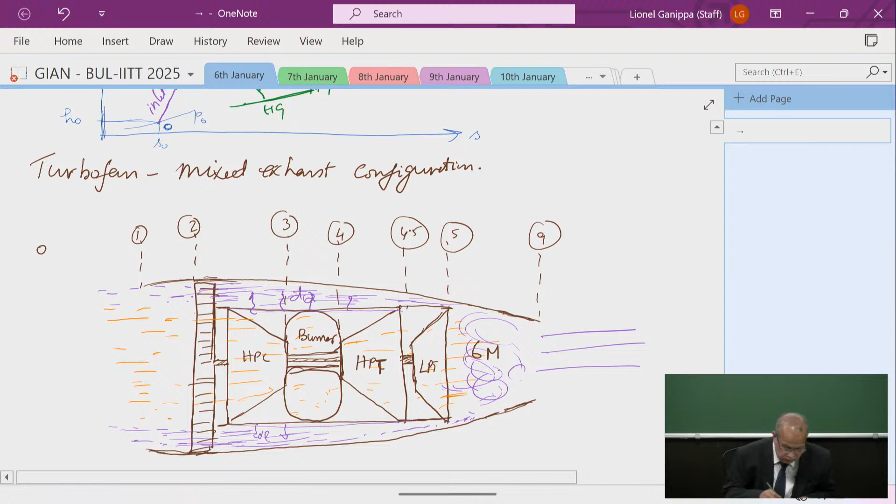You're recovering heat here. Then it will go in and start to mix with the central core. And then it is coming out as one nozzle, one jet mixed with hot and cold. So now you can see that's the reason why I call this the mixed exhaust stream configuration.

Okay, so this is the mixed exhaust stream configuration. Let's try to understand all of this. The critical element of this is that the pressure must be perfectly matched.

If there is a mismatch in pressure, then there will be a reversal of the flow, and that will damage the fan blades and bring the flight down. So that's the reason why you can't operate this at very high bypass.

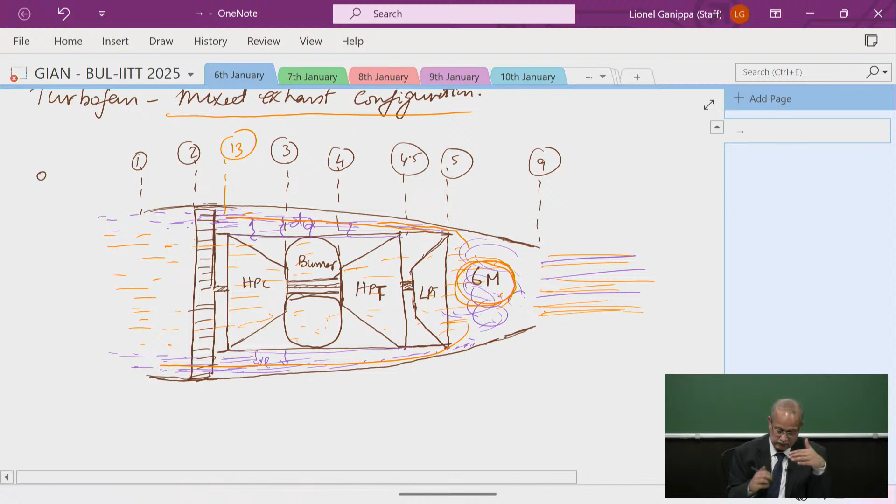You can operate this at very low bypass because you want to make sure that the pressure in the mixing zone and the flow streams are perfectly matched so that there's no reversal of flow taking place. So pressure scheduling is very important.

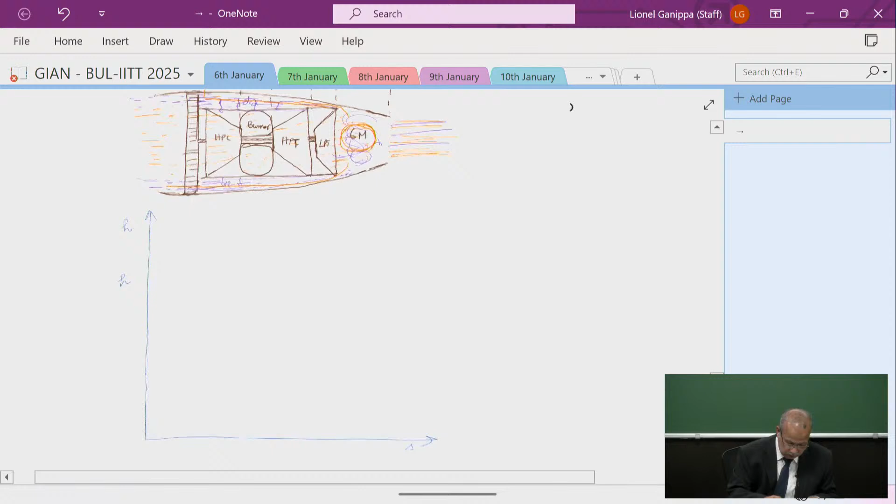Let's look at the enthalpy-entropy diagram. So this is the unperturbed free stream conditions, P0. This is flight static state, H0. In the inlet...

It is being pressurized in the inlet, PT2, T2, which is further being pressurized in the fan, P13, T13.

Then you have the core flow entering into the high pressure compressor, to T3, with pressure PT3. Then you have combustion taking place in the combustor, T4, with pressure PT4.

Then expansion taking place in the high pressure turbine, then expanding further in the low pressure turbine. Let me stop there at this particular point. So here is the high pressure turbine, then the low pressure turbine.

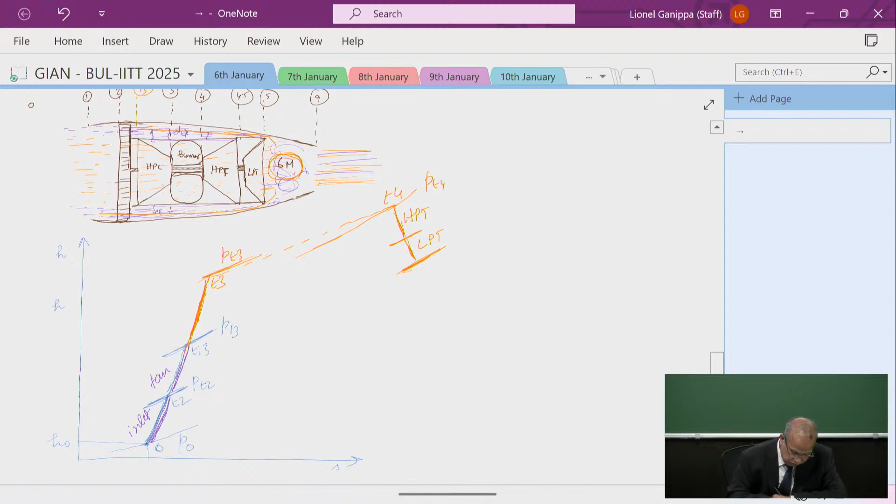In the meantime, that air which was also passing through the inlet, this is the fan, and that is bypassed, will gain temperature as it passes through. So the temperature increases here as it passes through.

And then eventually somewhere here, when you talk about the mixing, it is a combination of the purple and yellow, hot and cold. So this temperature will also give off heat as the mixing takes place. Somewhere here will be the place where you have the mixing.

And from here, it will expand in the nozzle. So this pressure difference is very important. Otherwise, you'll have a reversal flow taking place. Understood, all of you?

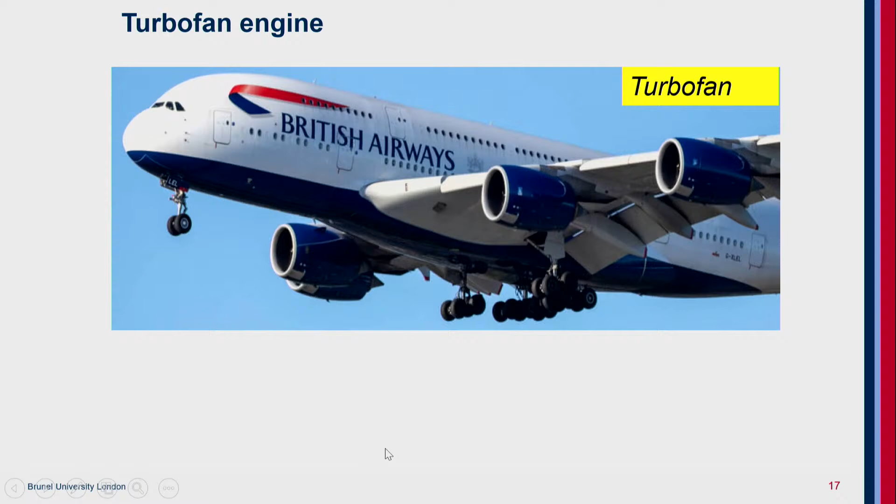That's the main advantage of it. This is achieved by increasing total air mass flow, but there is no need to burn fuel to heat the bypassed air. This also makes the turbofan engine quieter and produces more thrust at low speed than a turbojet engine.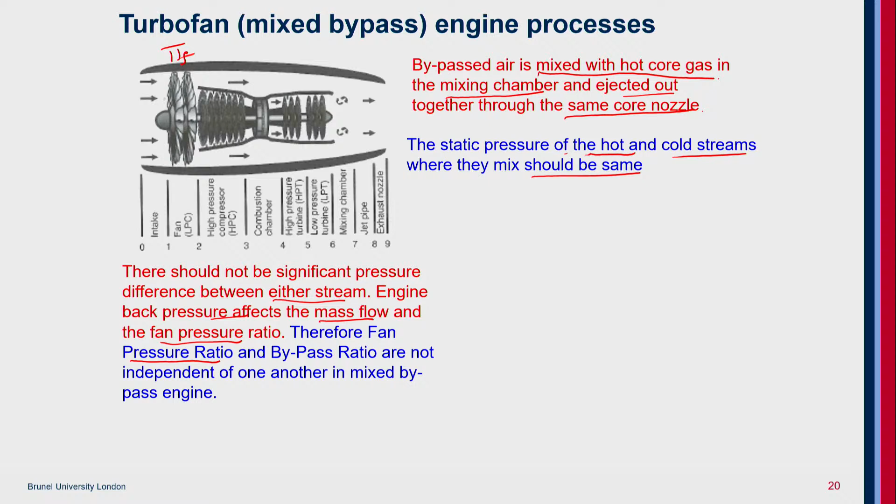Engine back pressure affects the mass flow and the fan pressure ratio. Therefore, this fan pressure ratio pi f and the bypass ratio alpha are not independent of one another, because otherwise you'll have the backflow. So engines are designed in such a way that the velocities of the two streams are as close as possible and the total pressure difference between the streams is minimal.

Okay, so now let's look at the third configuration, which is a turboprop engine. We already looked at the turbojet engine, improved it to have an afterburner for thrust augmentation, and looked at the cycle diagrams. We looked at the development of a simple turbojet for improving fuel consumption by recovering the waste, in a turbofan engine in two configurations: one is the unmixed, the other is the mixed configuration. Now the third configuration is a turboprop engine.

Now, turboprop engines can't fly at very high altitude because they have a propeller. Because it is having a propeller, one of the common limitations is there is a critical speed up to which you can operate the propellers, otherwise you will end up having wingtip vortices, which will result in the formation of shock waves, which is not desirable. This will affect drag and always affect the engine performance.

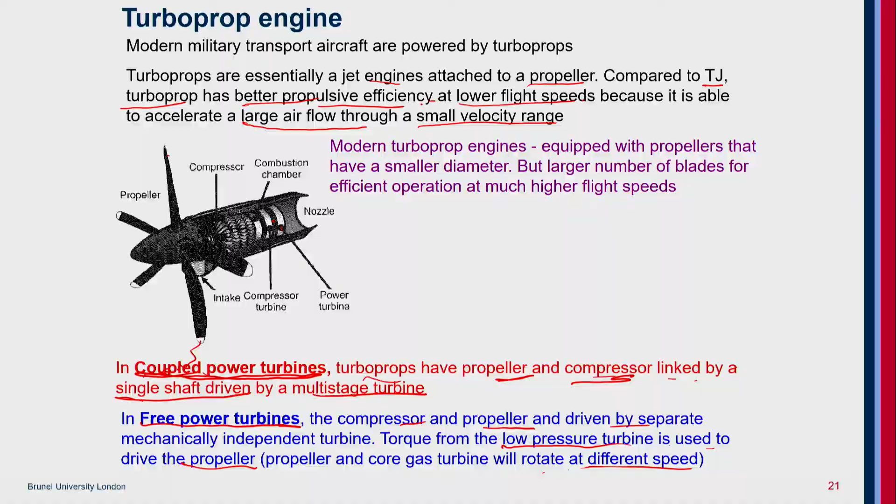Now the limitation is that you can operate it at low speed, but you can't operate it at high speeds, which means you can't fly at high altitudes. Also there are losses from tip vortex. But developments have taken place to go with smaller size propellers, but then go for more number of propellers, because these are much bigger propellers. If you have a smaller propeller, then have a larger number of propeller blades.

So modern turboprop engines are equipped with propellers that have a smaller diameter but a larger number of blades for efficient operation at much higher flight speeds. Now these are called prop fans. Again, the problem of tip vortex is still there, even for this - losses are still present.

To avoid that, the tip of the blade is twisted like a scimitar sword - let's twist it so that you can minimize the tip vortex. So you can see that swept back leading edge, just like how in an A320 the wings have a winglet. Have you seen this? Wings have a winglet, and that's to minimize the tip vortex losses there. So here in propellers, you have this swept back arrangement to minimize the tip vortex.

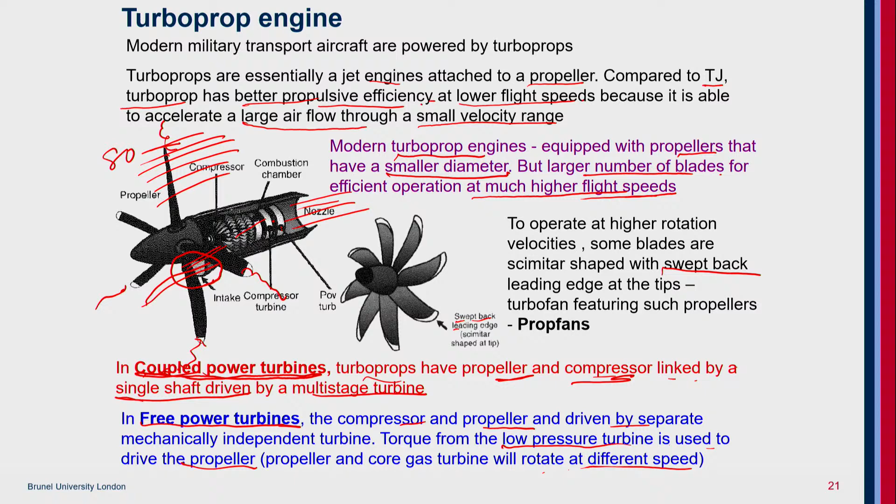Now again you can see that the inlet size here is much smaller. You don't need a huge inlet, because we only use 10 to 20% or 25% of the air flow through this inlet to produce thrust, since nearly 80% of the thrust comes from the propeller. So it is very fuel efficient, but it can fly at low altitudes.

So that is what we see here. In turboprop engines, normally 10 to 25% of thrust is obtained from the propulsive nozzle, which is the main core nozzle. The remaining comes from the propeller. So the turboprop engine has two thrust components: one by the propeller, the other by the momentum produced by the exhaust gas flowing out of the nozzle.

This power sharing has to be designed at the production stage itself, because the size, dimensions, everything has to be taken into consideration during the design stage. You can't just do it at the end. So the power sharing between the propeller and the jet is a decision made at the design stage of the engine for a given operating condition.

Since we have gone through it before, we will now move to the last configuration, which is a turboshaft engine. Turboshaft engine is not a jet engine at all, it's a shaft, there's no jet. All the power that is produced is converted as shaft power. And if you have a worm gear arrangement here driving a blade, then it becomes a helicopter. So turboshafts are mainly used for driving a helicopter rotor instead of a propeller.

Now almost all aircraft will have turboshaft engines, which serve as an auxiliary power unit used to generate electricity and other auxiliary air supplies in the aircraft.

Helicopter engines are generally designed so that the speed of the rotor is independent of the spool rating speed inside the core of the gas generator. This is the low pressure turbine, which is used to drive this shaft, and this high pressure turbine is used to drive the high pressure compressor. So you can have an independent rotational speed, and you could also make gear arrangements so that you can keep the speed of the rotor constant while varying the speed of the spool.

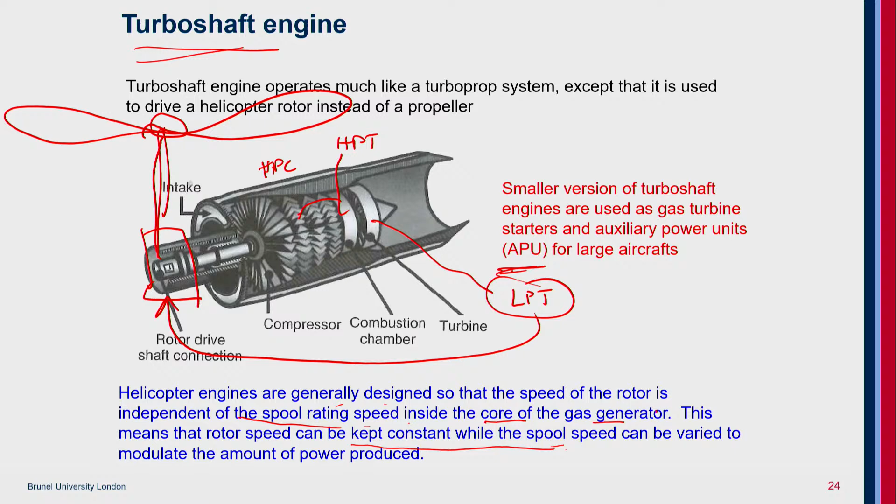So here you see this configuration. There is no ramming effect because it's running at very low speed. All you need is a streamlined flow of air entering into it, almost like a bell mouth entry. And here you have this reverse flow combustor. Flow comes back and mixes with the fuel, burns, and all that expanding flow is produced as shaft power, which is then used to drive the rotor.

There is no jet used to produce thrust in turboshaft engines. The turboshaft helicopter engine uses shaft power to generate thrust from spinning rotor blades; no jet is produced by expanding exhaust gases through a nozzle. The turboprop engine uses shaft power to drive the propeller, which generates most of the thrust. However, a small fraction of jet thrust is produced by exhaust gases expanding through the nozzle, but that is minimal, negligible.

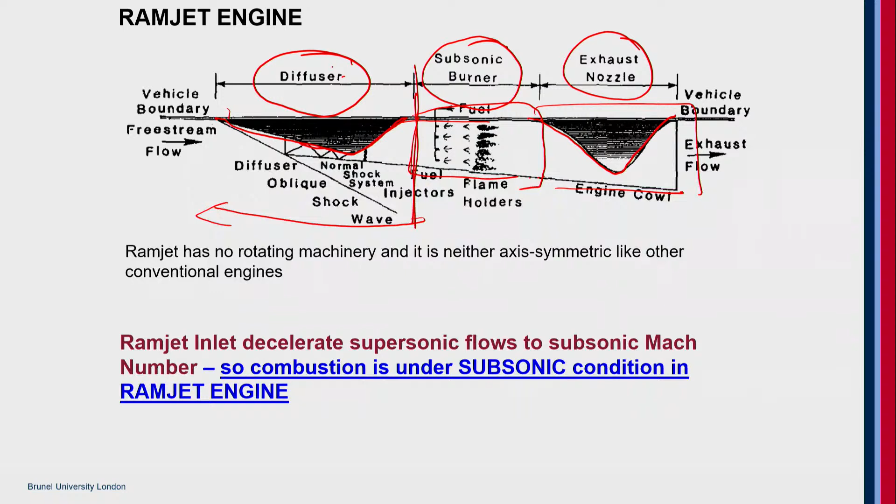We want the combustion to take place under subsonic conditions. We want to make sure the Mach number is less than 1. That is taken care of by the shock train configurations, which we will discuss tomorrow. So though it is flying at Mach 3 to Mach 5, when it comes to the combustor, it is subsonic combustion taking place because the air enters the combustor at M less than 1.

So the combustor burn gases leaving the combustor are still subsonic, so you need to accelerate it. You have a convergent section where M equals 1, and then you have the divergent geometry. That is the arrangement. You have no rotary components here.

When it comes to scramjet propulsion, we'll be discussing these details later. At the entry into the combustor, we are not decelerating it to subsonic, it's still supersonic. At the end of combustion, M is supersonic. Since we can't have a convergent geometry, which would reduce the flow, we want to accelerate it, so that's why we have only the divergent geometry.

So anyhow, we will be looking at these things in detail. I just wanted to cover this also: gas turbine engine propulsion and hypersonic engine propulsion. The commonality is that it also has an inlet like a gas turbine engine inlet, and then it also has a combustor.

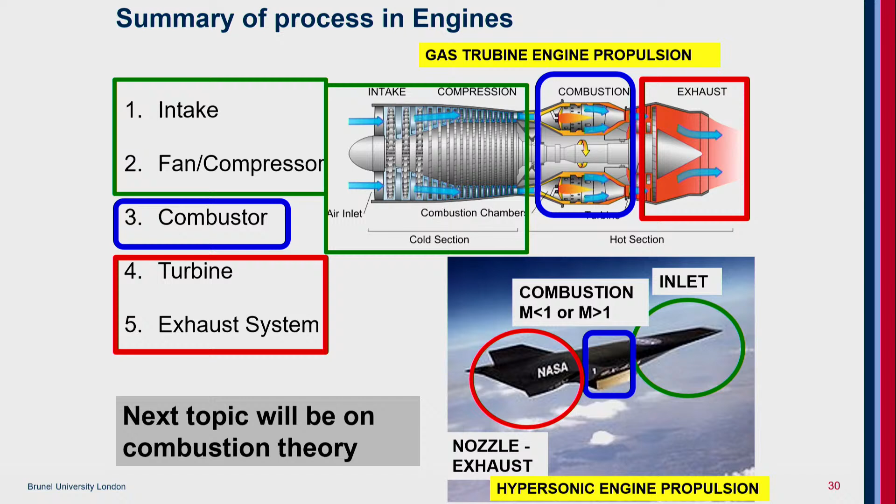Sir, what is the typical pressure ratio of P0 and P9? Because both are, that means the entry point P0 and the extreme outlet is P9. So what is the typical pressure ratio between them? Yeah, so that is from the nozzle point of view,

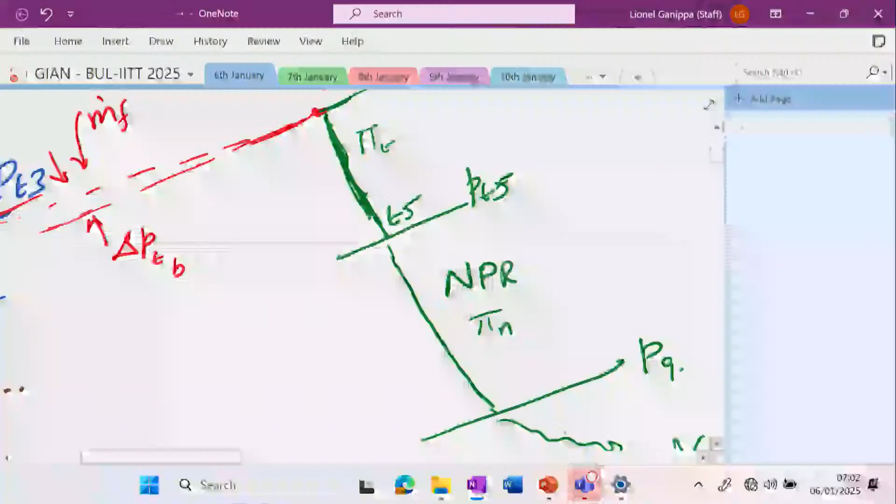let me explain this a bit more at this particular point. Just like how I explained that the inlet is adiabatic, the nozzle is also adiabatic. I mentioned it here: the nozzle is also adiabatic, which means the total temperature at this point remains constant, total energy, which means enthalpy HT5 is equal to HT9, HT9 again coming to the question you asked here.

So this is the temperature T9. The total temperature is TT9, and the pressure is P9. The total pressure is PT9. So if it is an isentropic process between P9 and this, in other words what I'm trying to show is this is P9. The question you asked, what's the difference between P9 and P0?

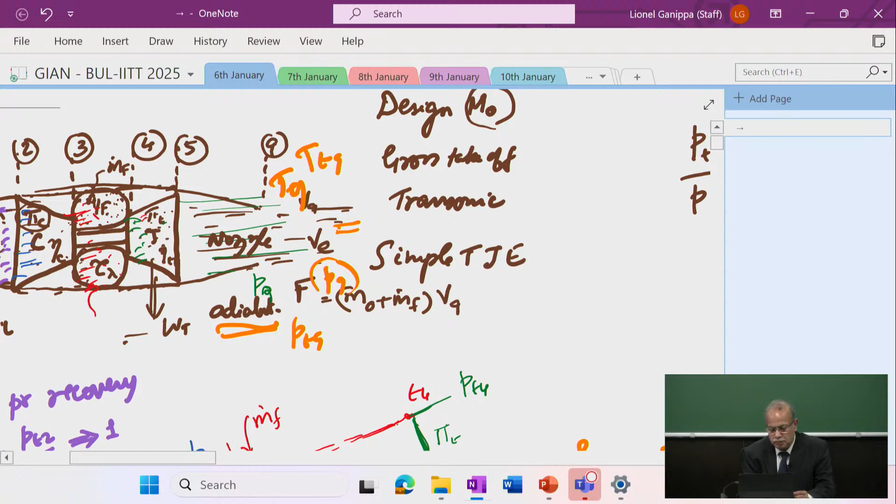If I place a pitot static probe here, I will be able to measure PT9, the stagnation pressure. Understood? Okay, so that will be the stagnation pressure here. Now, this ratio...

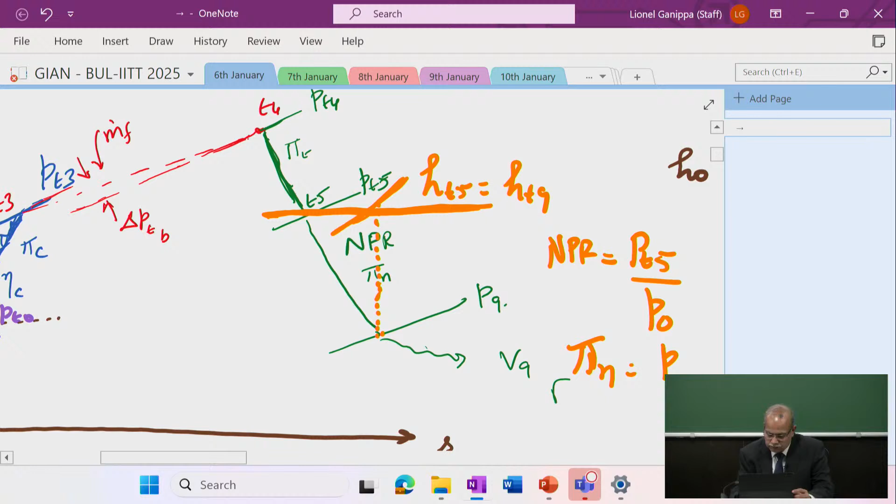From here to here is the nozzle pressure, no, this pressure from here, the nozzle pressure ratio, is PT5 by P0. That's the maximum potential that is available for the nozzle to expand. And then the total pressure ratio of the nozzle is PT9 by PT5, the total pressure ratio across a nozzle. And this nozzle will have an adiabatic efficiency.

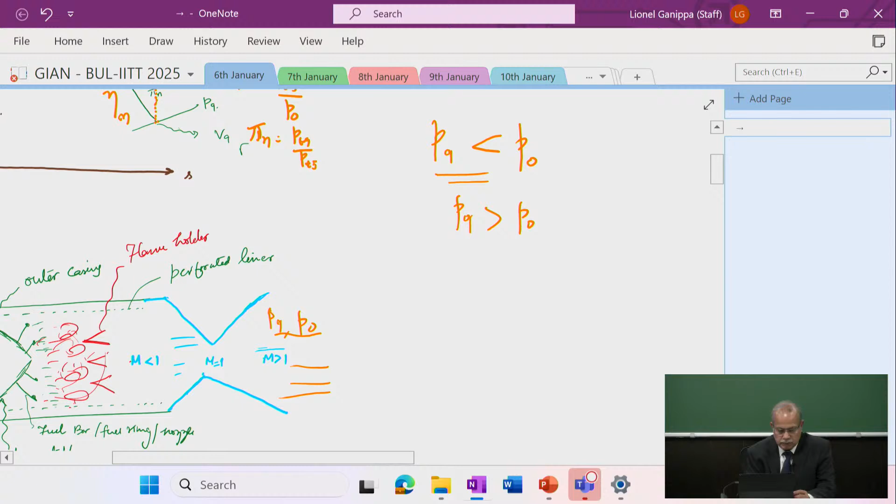Now, the question you asked is very important, because that defines what kind of flow is coming out. So if P9 is less than P0, it is overexpanded. If P9 is greater than P0, it is underexpanded. So this is the check we'll be doing later on, P9 and P0. If the difference is there, then it could be either underexpanded or overexpanded. Depending on that, the flow structure coming out of the nozzle will be different.

If you look at the adiabatic efficiency of the nozzle, it is dependent on the nozzle pressure ratio, and then P9 by P0 power gamma minus 1 by gamma, minus 1, divided by nozzle pressure ratio into P9 by P0 power gamma minus 1 by gamma, minus 1. This is the efficiency of the nozzle.

So that's what you see: the nozzle efficiency term, and then P9 and P0 play an important role. If P9 is equal to P0, then it is perfectly expanded.

But to make it perfectly expanded, most of the modern applications are coming with a variable area geometry nozzle, which means you can vary the area so that you can adjust this to have P9 equal to P0, which is the optimum design configuration. But that is also difficult because P0 is also changing constantly.

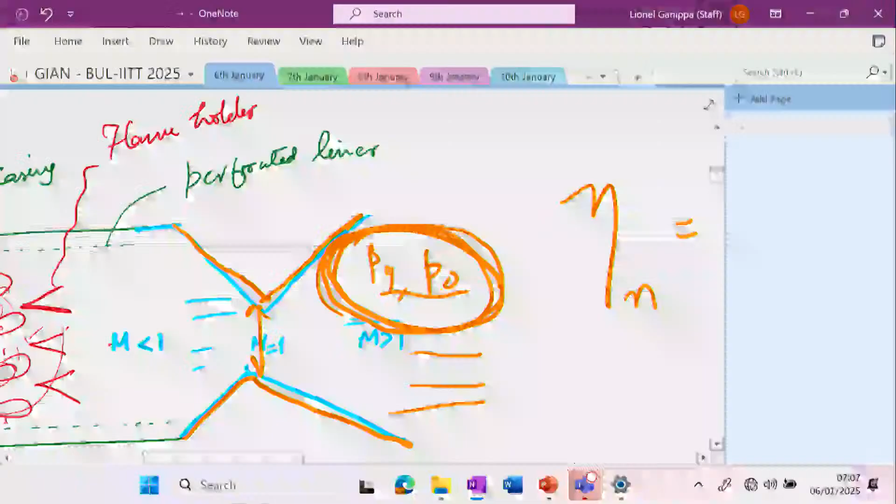With the height, depending on the environment at which it is flying, we may end up in a situation where it could be either an overexpanded condition or an underexpanded condition. Depending on that, the flow structure, the shock diamonds that are being formed, will be different.

I think we'll be discussing that on Wednesday, day after tomorrow. We'll be looking at this aspect, P9 and P0.

Another question: already you have told that during this turbofan in mixed conditions, the velocity or pressure of the bypass air and the combustion air which is coming from the nozzle, if these two are not exactly the same, either it will backflow the bypass air or it will be creating an obstacle to the nozzle exhaust.

So especially the same question, if P0 is constantly varying, how do these two exactly match? Is it totally a design concept, or is some control system there? Because even a small deviation in the pressure, if the two pressures mismatch, it will either backflow or restrict the outlet flow of the nozzle.

Yeah, it's very critical actually, I think. Through one of my student projects, we did this simulation for this condition. There is a limit, a small limit up to which you can operate it.

But primarily it is design features, the fan bypass ratio and the fan pressure ratio and the bypass ratio, they have to be matched. If they are matched, then the surrounding conditions varying, that affects it.